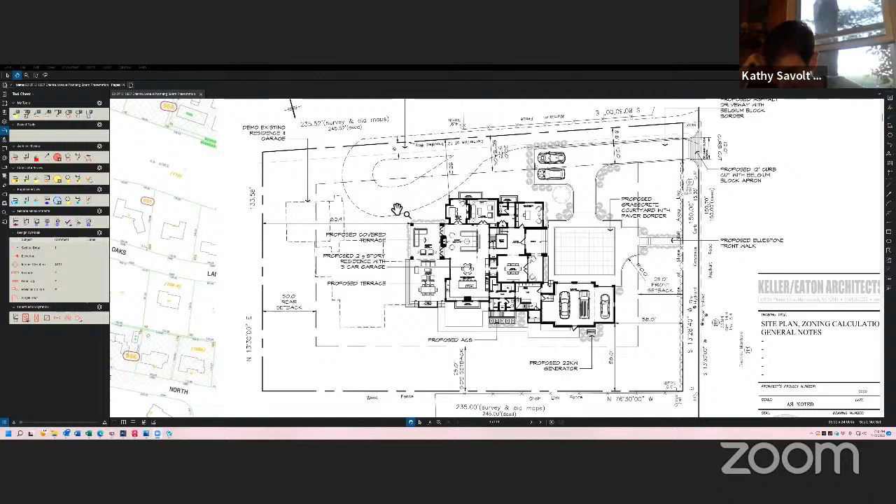I'll start over. So on this side is Orienta Avenue. And the dashed line is the existing footprint of the house that we are taking down. It sits well far into the rear yard. So our goals were to move the house forward, more in keeping with standard positioning of homes.

Some of the other factors that came into play were the fact that we wanted to keep certain of the big trees along the street side, which were rather large. We also wanted to have a driveway with an ability to turn around so we can pull forward onto Orienta, because it's a rather busy road and visibility is a little tough right there at the entryway.

We also like the idea of extending a front walk to the existing sidewalk, so we were more connected to the community. That explains a little bit about how we arrived at where our house sits. As one of the consultants pointed out, there is a travel way along the northerly side of the property. We've moved our driveway completely off that travel way.

And just to briefly talk about that, because it was brought up in one of the consultants' memos. This is a travel way that's at 6 feet on our property and 6 feet on the adjacent properties, more or less. This was put in place decades ago when Bayhead was not built, so there were some landlocked homes, and that was the reason for it. But since Bayhead was created, no property is currently landlocked. And right now it is not a public easement or travel way.

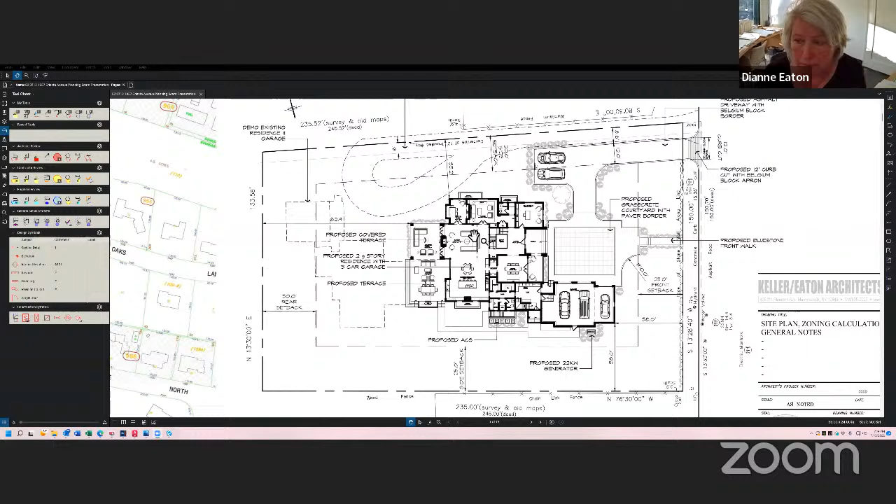My client is in discussions with the neighbors that are impacted just to see exactly what can be done. Our goal would be to remove the gravel because it's rather unsightly and we find it obsolete in terms of functionality, but that's to be determined with the adjacent neighbors. The house is fully complying with all zoning regulations. So I think I'll just start going through the rest of the documents. Sorry, I have a little bit of a scratchy throat.

We have now the consultant drawings from Michael Stein. There are a number of trees that we do have to take down just based on where the house is currently situated. A number of them are really right on top of this home, so we do have to take some down. We were trying to be very mindful of keeping as many as possible, and this is what we arrived at.

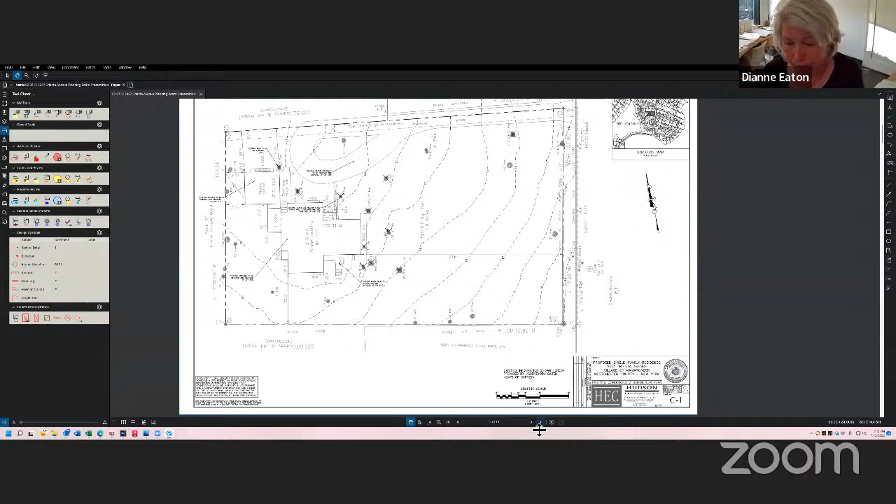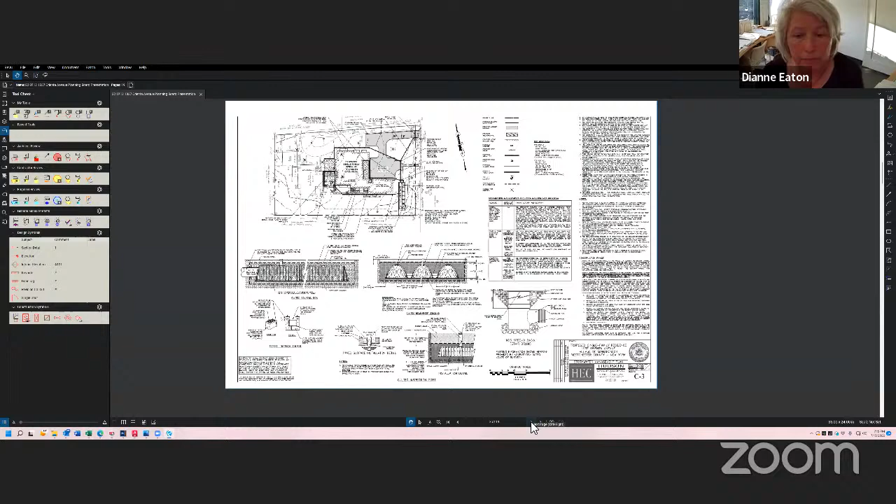Going further along, this is the beginning of the surface water and mitigation plans. We have silt fencing wrapping around, tree protection details. The dry well system we have is situated in the front yard here, and Michael can speak at greater length on that, more details in terms of that Cultec system.

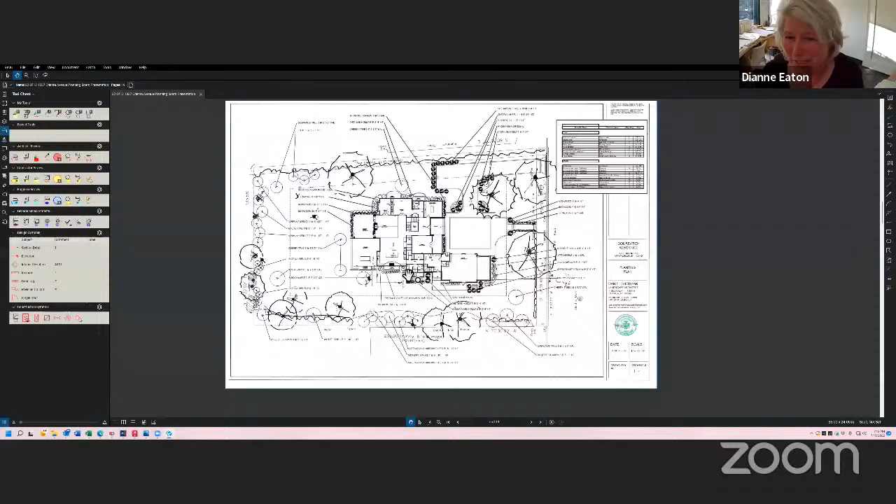Moving on to Dan Sherman's landscape plan, again pointing out some of the trees that we're saving, infilling around the perimeter where we pruned out some invasive species like burning bushes, trees that are dying. There were a number of trees not in great shape. This includes some screening, some boxwood screening around parking areas, nice plantings around walks, screening around condenser units, etc. Dan will be able to talk you through that with much more grace than I just did. These are just additional documentation of things Dan had provided in case you need to refer to them, plant list, etc.

Moving on to the floor plans. It's an L-shaped home. The garage situates forward of the property. There's a drive court here. Then walking in, it's a pretty common layout where foyer, family room, kitchen towards the back of the house, dining room off to the side, mud and service spaces connecting the kitchen to the garage, and a study and some other private, smaller living spaces off to the north side.

We have the children's bedroom over to one side, the master suite on the other. This is on the second floor. Over the garage, we have a study, in this day of everybody working from home, and another guest bedroom for long-term guests. The basement is also fairly typical with a recreation room, gym, and the guest bedroom.

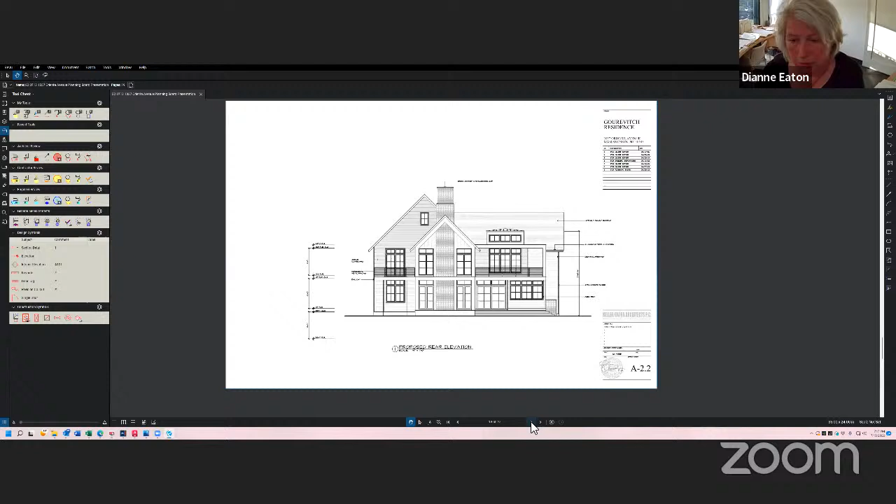Anyone else from your team want to go through any more detail at this point in time, since this is sort of a preliminary overview?

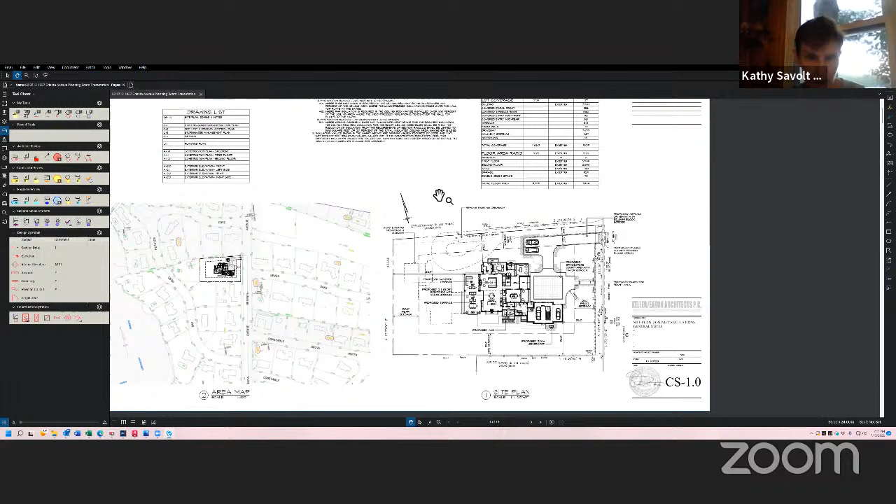Good evening, Michael Stein with Hudson Engineering. Just very briefly, we have received the comments from Kellard Sessions Office, relatively minor things. We've already gone through and addressed most of them, so we'll definitely have the submission in for the next meeting.

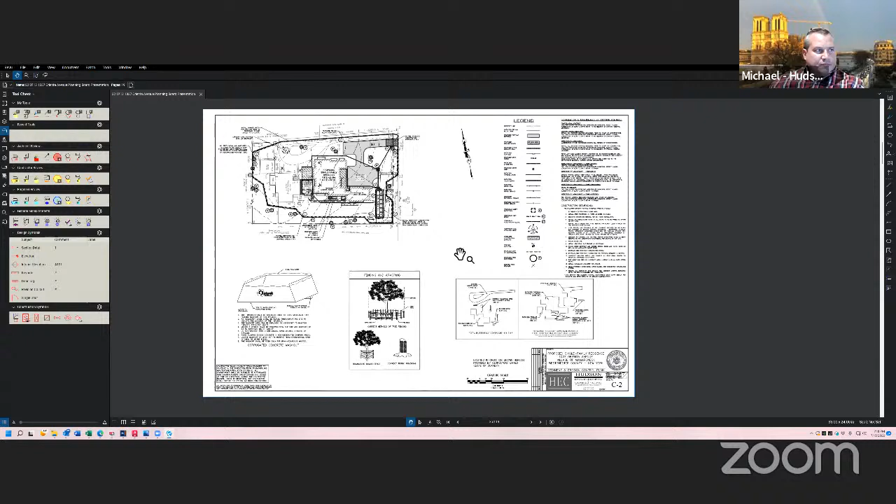Okay. Dan, maybe you'd like to comment. I'm sorry, Dan, would you like to comment on yours? Yeah, if Diane, can you bring my page back up? Yep.

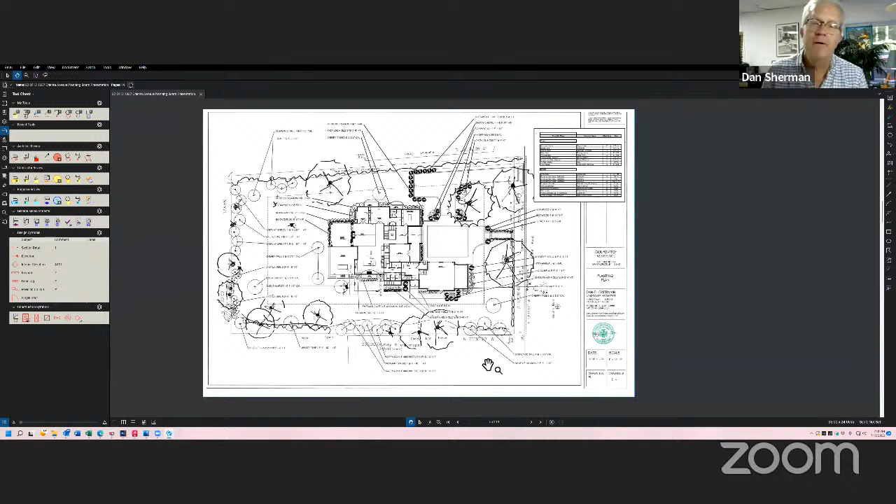So we did a planting plan and we're removing a number of trees, probably at the top. There's about a dozen trees, and I've replaced them with new trees of the very same species. So there's white pine, sugar maple, and cherries that were on the property. But I am also in receipt of the Carabella land design review, and it pointed out that we should try for more native species as well. I think that falls mostly in the shrub category, because in our trees I have sugar maple, river birch, American dogwood, white pine for the trees, and a couple cherries.

I don't think lilac is native, but the shrubs I did not draw from a native list, and I can work on that. I have Andromeda because the deer-resistant boxwood lends itself; it's deer resistant, but also works with the style of the house. The Emerald euonymus is a ground cover that's seasonal and evergreen and attractive, but these are not native things. So that's my next step, to review it and get things that still serve the purpose of making an attractive home for the homeowners, are deer resistant, and serve the purpose, but are native. I'm aware of what kinds of things would do that, but we just got this memo, so I haven't done it yet, but I will. I don't think I can get 100%, but I bet I can get up to 80% native, I think.

Okay, I think that gives us an overview of the project. As you've mentioned, as consultants to the planning board, we do get a jump on things. We kind of fast track, we start the review before the first meeting, so we do have some comments already to give you, and from AKRF to go over some of the things they pointed out to us. Alicia, are you going to do that tonight? Yep, I'm here.

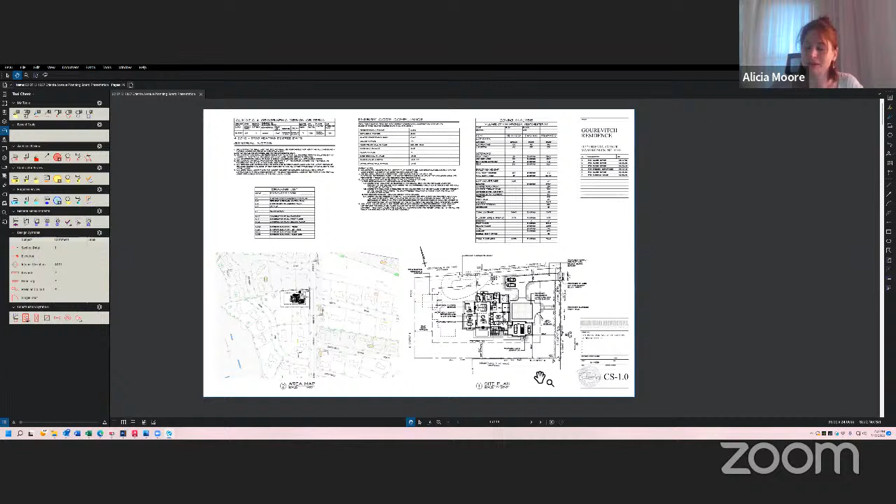And that the site plan, if that could just include the floodplain and the hazard areas. Also, sign the EAF. Those were our main concerns, and of course, recommending that this is a type 2 action under SEQRA.

I tend to go, and I think it was from one of my last hearings, I went to the DEC and that automatically filled that in, as you pointed out. So I did go onto FEMA and printed out a FIRMette, and we are not in any flood zone. I'll provide that documentation in our submittal. And yes, I will sign it.

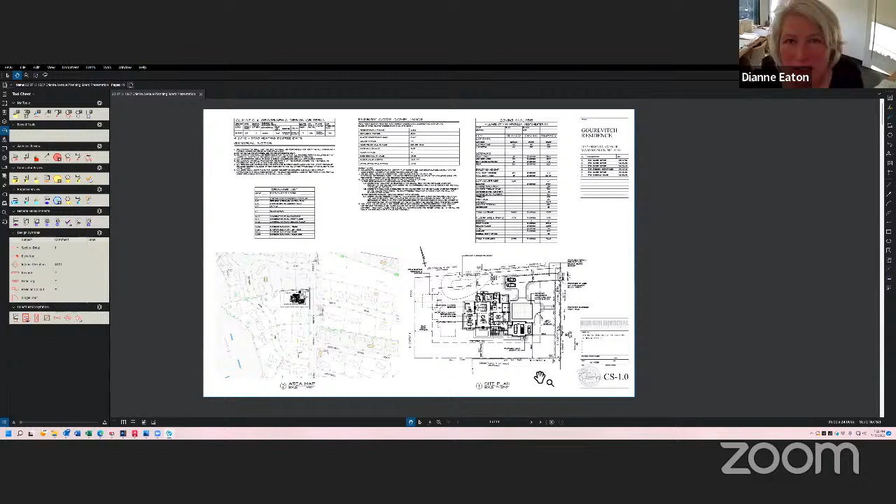We're losing you. We're losing you again. Sorry. Michael, could you comment on the gravel potentially? Her question about the gravel being part of impervious.

As far as our calculations go, we're treating that as impervious, just because it's basically our standard practice, and I know working with Kellard Sessions, that's typically what they're looking for. More than that, as far as lot coverage, typically we wouldn't count that as impervious.

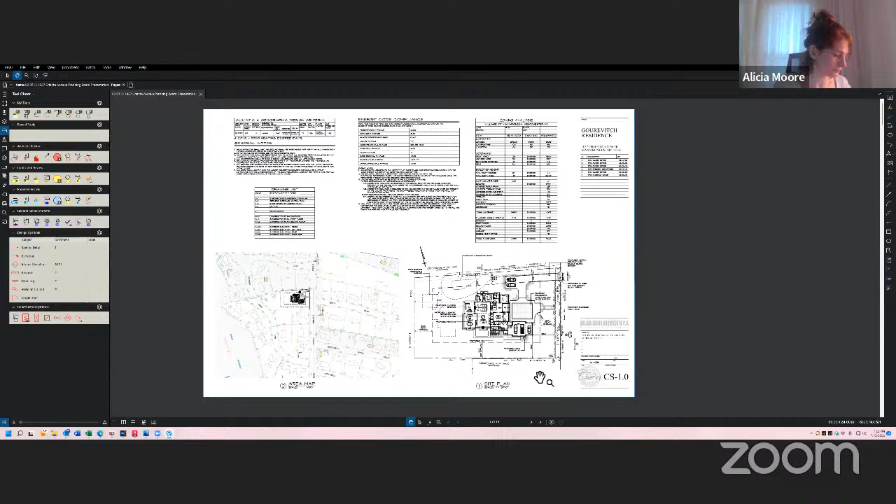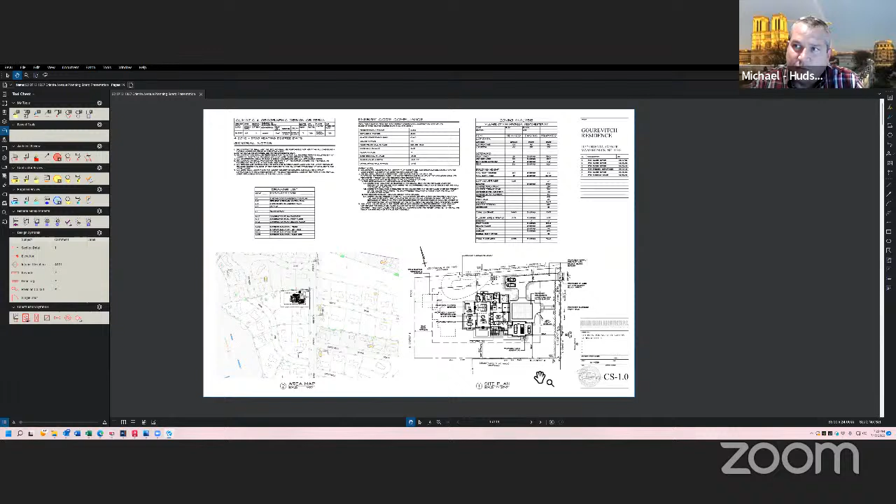Okay, all right, so we just have to make sure if that's not impervious, then it's not calculated in the current inventory of impervious, versus as proposed, because we know there's a significant increase in impervious surface with the size. We'll take a look and review, and just make sure it gets clarified. Yeah, make sure it's fixed, yeah.

Okay, thank you, Alicia. John from Kellard Sessions, you want to go over what your initial comments were? Sure. Good evening. Review of the site plan.

The applicant's proposing to mitigate the stormwater through infiltration devices in the front yard. The important part of their design is that all discharge from impervious surfaces will be detained within those units, and it will all be infiltrated into the ground up to the 25-year storm. Why that's important is there's no drainage on Orienta Avenue, so we won't have any discharge up to the 25-year storm.

I noticed that the house will have a full basement, and I assume a sump pump - correct, for the footing drains, which have to discharge somewhere. We ask that you show that discharge location, and if we can mitigate that flow so we don't have discharge directly to the road or neighbors' properties from the sump pump. I think we've handled other projects in the village with Mike Stein's office, where they've discharged the sump pump to an infiltration unit in the yard, so that we don't have a point discharge.

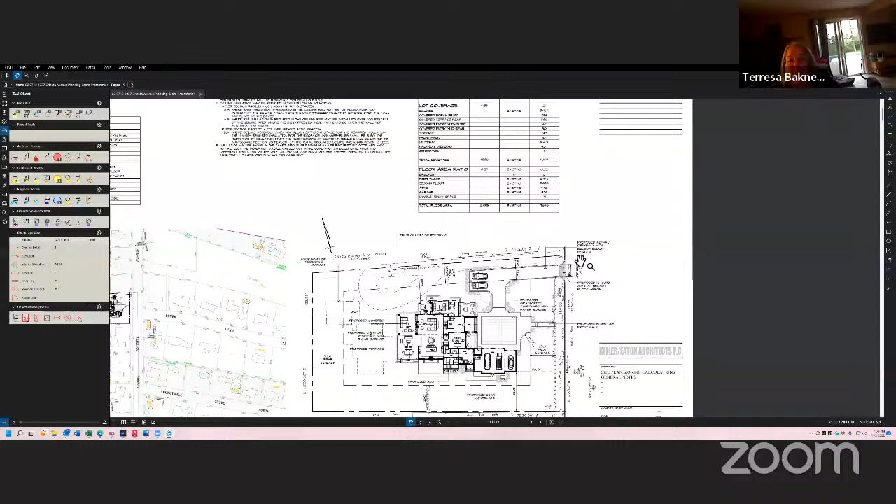Before we leave John and Susan's comments, I just wanted to make an observation. A lot of times the landscape architect will make a change to satisfy a comment by Susan, and it will require more comments from John in the stormwater category. Anything you can do to coordinate that amongst yourselves will make everything easier for everybody and end multiple comment letters. That's just a suggestion on my part.

Not only the details on the plan, but if you are required to plant more trees to replace the ones you're taking down than you have in the plan right now, it's going to impact your stormwater management plans. Just so you're aware of that.

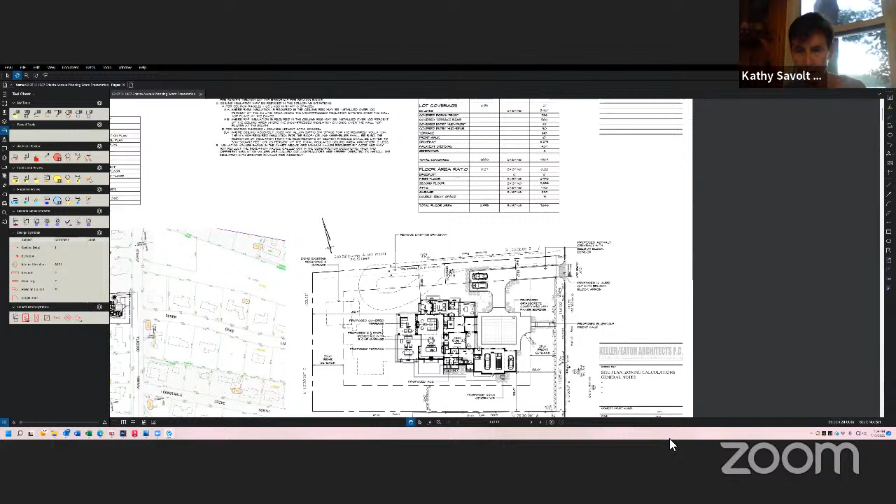Can we get to a view where we see the gallery instead of the screen, please? This is a single family home. We'll type it for SEQRA. But before we do that, does any member of the planning board have any other comments or questions for the applicant, so that they have a full idea of where we stand right now, things they have to respond to, or any questions that we have.

I have a question on the planning board application, third page, section 2 environmental assessment form. Items 5 and 6 were checked yes, and I don't know why, because I'm not sure this site is adjacent, located in, or contiguous to, or has a significant effect on any critical environmental areas, nor do I think it's anywhere near sites of historic, archaeological, or cultural significance. But I think, Ms. Eaton, I don't know — also filled in automatically by this DEC mapper. You're talking about the EAF form?

Yeah, items 5 and 6 under section 2 environmental assessment form. I don't know. Seamus, you're on HCZMC more recently, you asked the exact same question I was going to. If you look at that detailed mapper, Long Island Sound is a critical area, that's what's popping up, and I think we can all assess the proximity of this lot to Long Island Sound. But I don't know why the archaeological sites came up. Yes, but that's also in the EAF mapper, the last page. Computers — sometimes, is it the old saying, garbage in, garbage out? Somebody did a program for something.

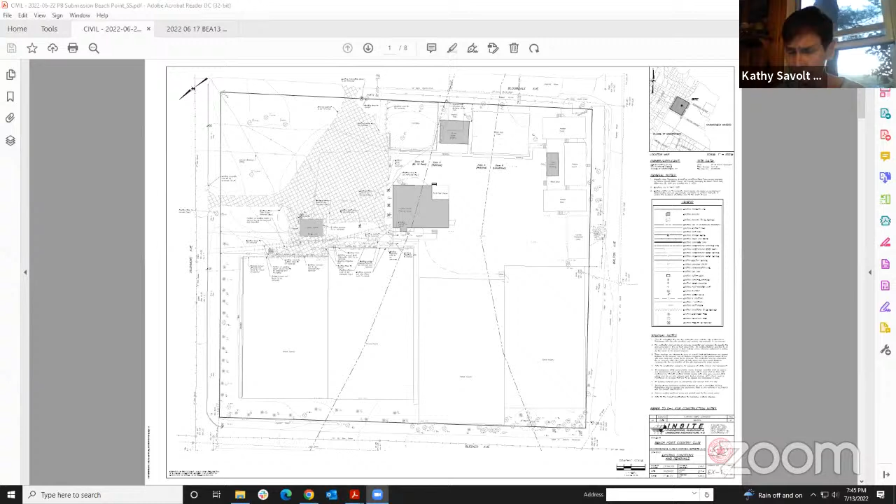My name is Kathleen Gallagher. I am with Insite Engineering, Surveying, and Landscape Architecture. I am also joined tonight by the applicant, Randy Reuter of Beach Point Club. I will share my screen. Does Randy need to be promoted? I just did. Okay, hi Randy.

The proposed project at Beach Point Club consists of the demolition of an existing tennis pro shop building, the construction of a new tennis pro building and a viewing pavilion within the same general area as the previous, the reconfiguration of the existing parking lot, and associated utilities, including upgrading stormwater management practices.

To orient ourselves to the drawings, north is on the top left-hand corner of the screen. Beach Point Club is located at 900 Rushmore Avenue in the Marine Recreation Zone. The club owns two parcels. One parcel is located to the east across from Rushmore Avenue, where the main clubhouse is located, and the second parcel is located to the west, which is the parcel shown on the plans.

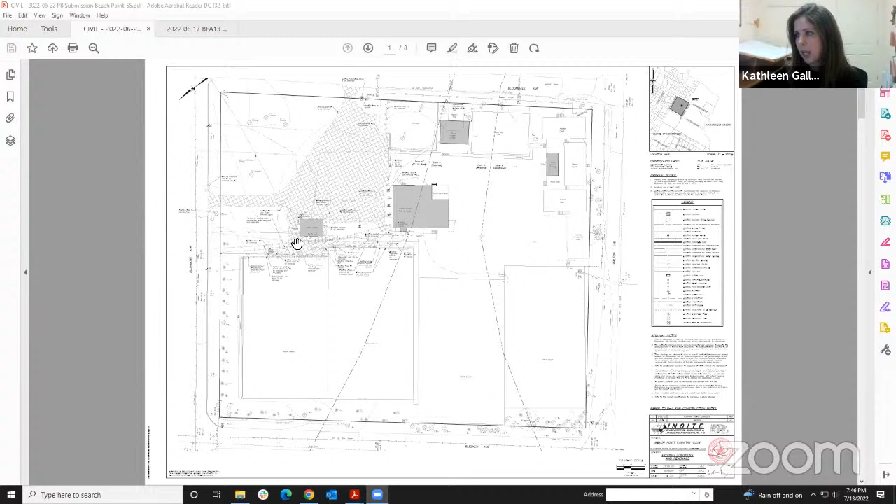This 5.4 acre parcel is flanked on four sides by streets, including Rushmore Avenue, Bloomdale Avenue, Walton Avenue, and Bleeker Avenue. The lot consists of several recreation courts. You can see the tennis courts located on the bottom of the screen, as well as supporting buildings, including the tennis pro shop, which is the subject of the application, located in this area. The existing parking lot to be removed is this large hatched area in the middle of the screen.

It should be noted that the eastern portion of the lot is in the AE 12 floodplain, and you can see that dividing line right here. So we are in a floodplain on this portion of the site, and then it transitions into a hatched zone X and the unhatched zone X.

As previously mentioned, the project includes the demolition of the existing pro shop. And if we move on to the layout and landscaping plan, the construction of a new one-story tennis pro shop and a viewing pavilion in generally the same area as the previous building. The project includes updating the hardscape located around the proposed building, as well as the landscaping in the same general area and the addition of several light poles along the edge of the parking lot.

The landscaping for the project does include the reuse of hydrangeas that are on site and are in pretty good condition, so we are proposing to reuse 25 of those hydrangeas on site.

The existing parking lot that is proposed to be removed currently has around 27 spaces, and we're able to increase the total parking lot to 49 spaces. We were able to do this with only a slight increase to the overall footprint of the site and just making the layout a little more efficient. We were able to substantially increase the total parking on site.

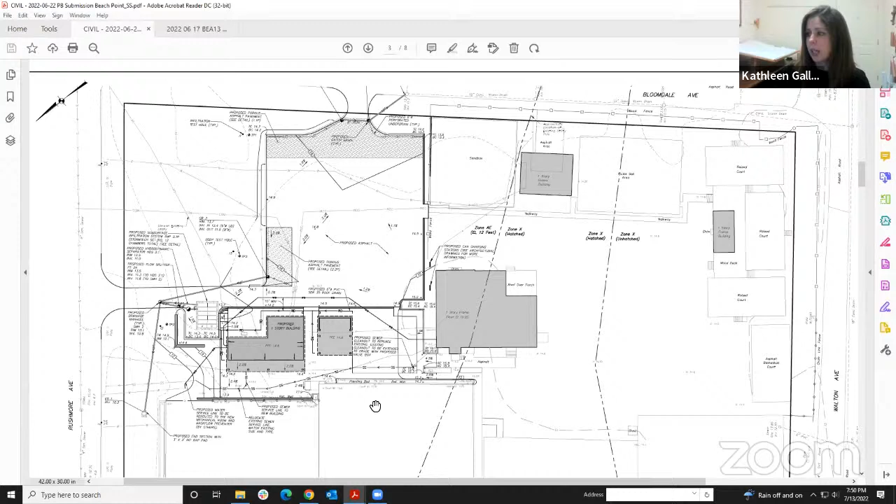Water and sewer service is going to be rerouted but connect into existing conditions and existing connections that we already have on site. And that concludes the main technical portion of our presentation. I'm happy to take any questions from the board or the consultants, as well as hear the consultants' comments.

So do you have any other presentations to do for tonight, or was this everything that sums everything up?

We do not have the architect with us tonight, but I do have their floor plans and elevations. I guess the most illustrative is this elevation, which shows the proposed tennis pro building and then the proposed pavilion. The pavilion is open air on the sides but covered with a roof. Obviously, if we're watching tennis in the sun, we want to provide shaded areas for them in this space.

So we can then pivot to Alicia from AKRF.

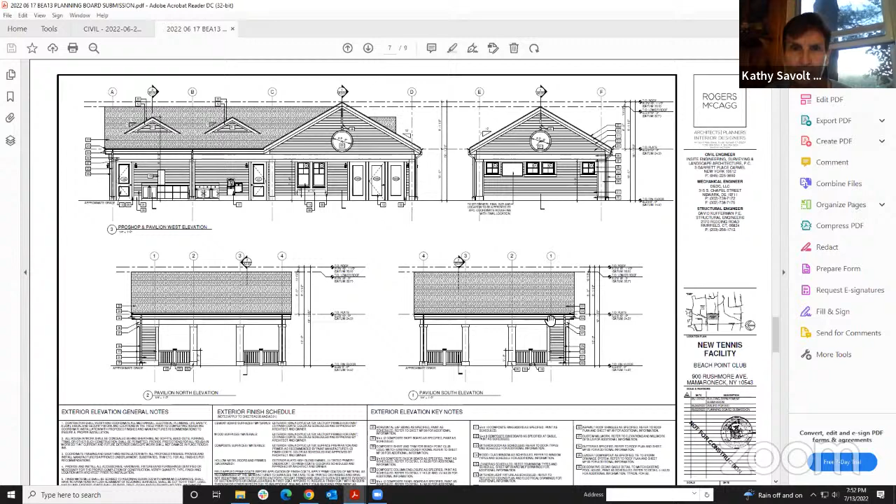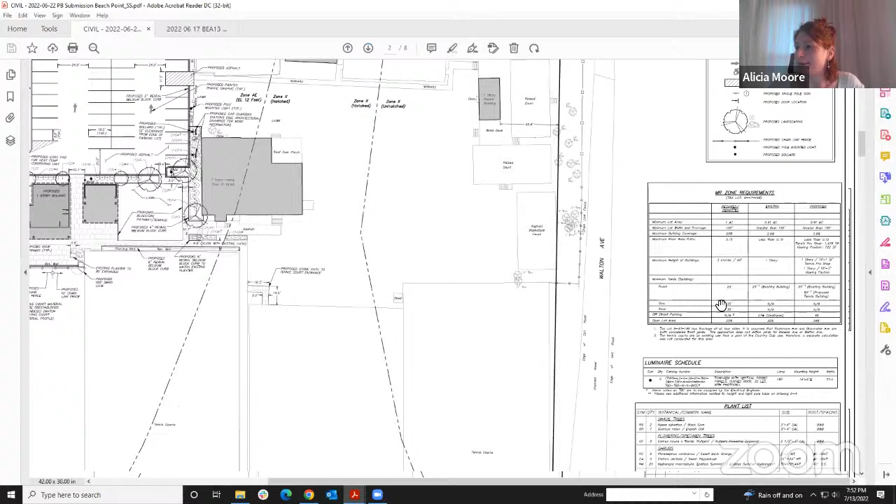Hi. For this one, as a fundamental thing on the site plan, it would be helpful to add a zoning analysis table that compares the proposed dimensions and other technical specs to the requirements already in the zoning code. I do have one question: could you talk a little more about what past requirements we already have on the table? It doesn't have to be tonight, we can talk offline, but I need a little more clarification on the additional categories you want to see on that table.

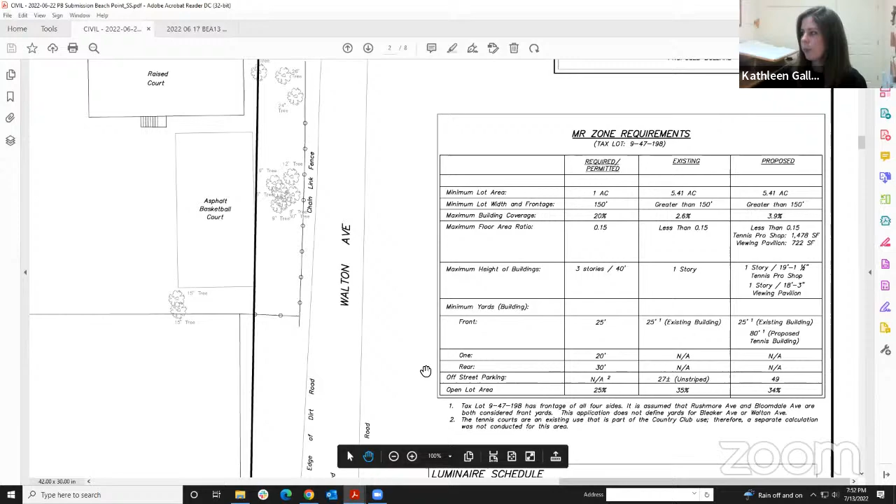Okay, sure, I will take a look at that and send over any comments. Which sheet is this on? I'm sorry, I can't see that. SP1. All right, thank you. That may be sufficient, I just want to take a second look. Perfect.

So yes, we see that you also noted there's another application coming before the board for the marina, and given that that's sufficiently distinct, the applications don't need to be combined. And the parking lot, which is great, would increase efficiency and safety, and I guess that's nearly double the number of parking spaces.

And given the location of the site, the application will need to be referred to the HCZMC, and it also requires approval by the Board of Architectural Review. And as you mentioned, it's in the AE flood zone, so it will have to comply with the additional requirements of Chapter 186 in the code.

And then finally, we're recommending that it's a Type 2 action under SEQRA. That's because of the size, correct? Right. It's number 9. What the exact threshold is, I'm not going to guess, but yes, it's because of the size. Because it's smaller, it's 4,000 square feet, I believe, with the cutoff. Yeah, I believe so.

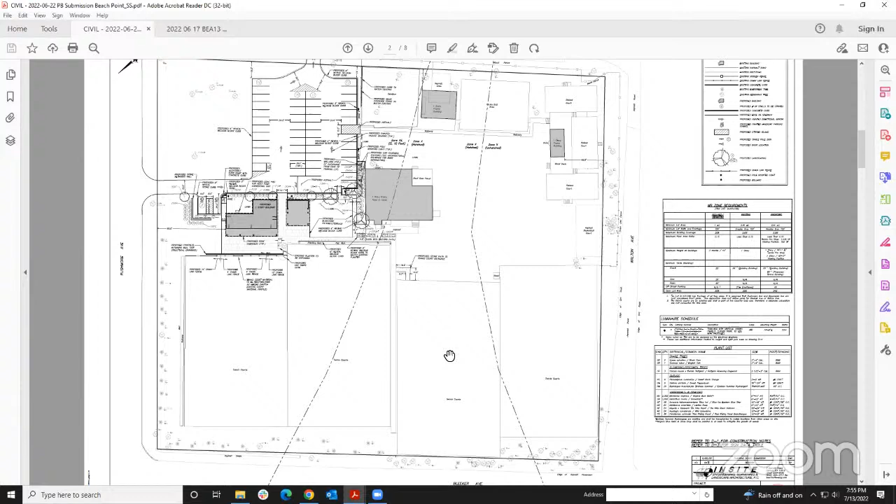That might help us see that. Maybe Brittany can get a hold of that off the notice and disseminate it to the planning board members. Yeah, I can get a copy. Thanks.

Okay, we don't have comments from any other consultants. I don't know if John, is there no review from the consulting engineer because of the size of the project? No, I submitted a review. Oh, must have missed it, I'm sorry.

Why don't you walk us through it then? Sure, enlighten me, I'm not home so I'm kind of in a mess here. As Mrs. Gallagher mentioned, they're mitigating the stormwater through the infiltrators proposed on the northeast side of the property, and using porous pavement.

We're reviewing the calculations. I had some initial comments which I've provided. Many of my comments are just typical housekeeping notes, documenting certain issues with the erosion and sediment control plan, such as the concrete washout areas and the required items that need to be submitted.

The more important items - the first one is the floodplain. It appears there is fill being placed within the floodplain, and the applicant will need to demonstrate that compensatory storage is being provided to compensate for that fill, so that it ends up as a zero net increase of fill on the property. So we maintain the present volume at a minimum.

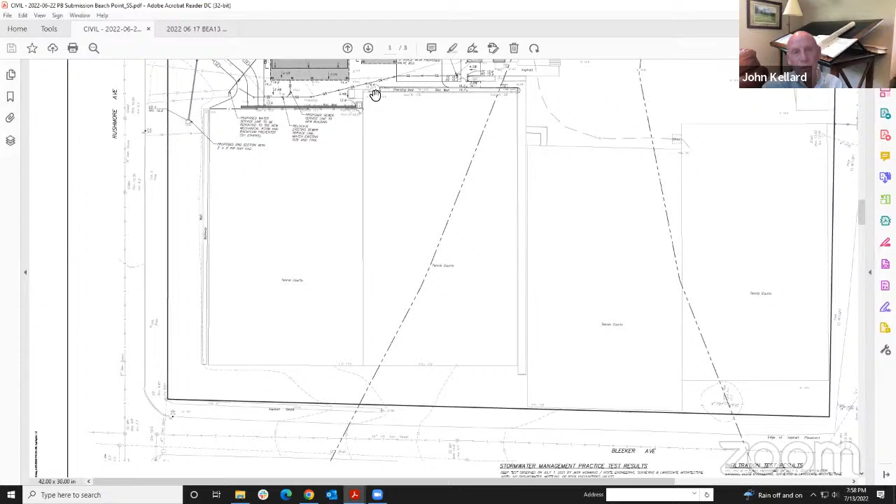It's something we can look at. There are a lot of trees in this area. Could we possibly take a look at what it might take to detain or infiltrate the complete runoff? Possibly a few more infiltrators will eliminate any discharge at all. That's something we can look at, and if you'd like to call me we can talk about it. Great, that'd be great.

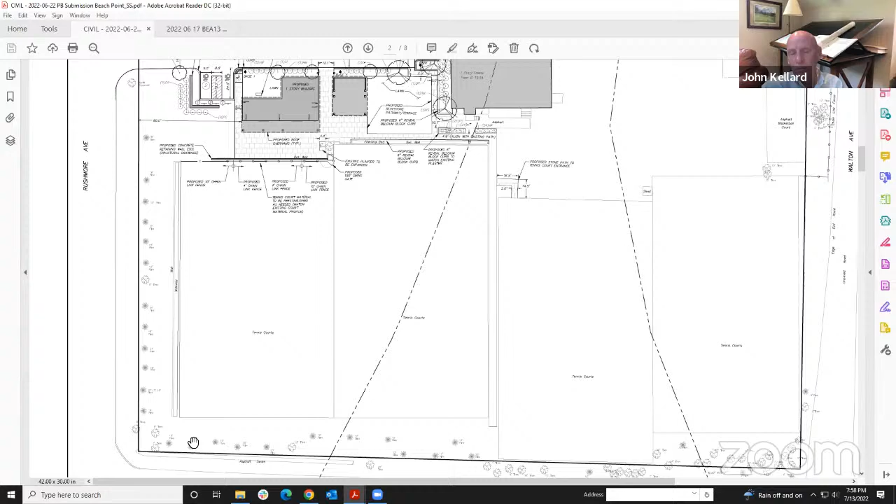On the plan I received, I noticed on the plan you're presenting tonight you have dimensions on the parking lot. I believe the plans submitted to us did not have the dimensions, so I didn't know how wide the spaces were or the drive aisles. It appears this plan does have it.

And obviously I had a concern with the two one-way flows, but now that you explain the daycare and the drop off of the children, I can understand why you're looking to maintain that same flow in one direction.

Obviously you'll need to show any signage in the parking lot. I wasn't sure if the existing parking lot was being maintained, you were just adding to it and topping it, or you were going to remove it and repave it. I just wasn't clear on the plan. It doesn't matter to me one way or the other, it's just if you could clarify that on the plan.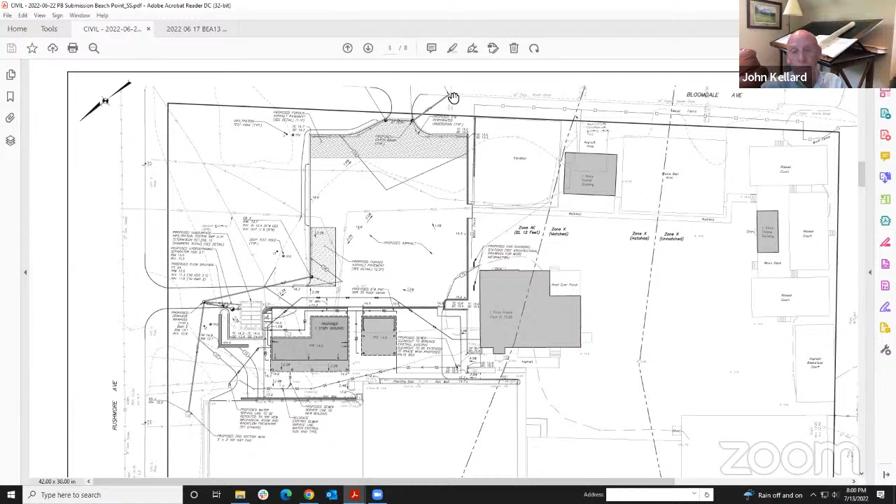Any stockpile locations, concrete washout, as I mentioned before, some standard notes. And obviously you would need a street opening permit from the village DPW for the connection - on the south side you're connecting to the existing drainage system. But other than that, it's a clear plan, easy to understand, and I'm sure it'll work if we can address these few issues. Okay, thank you.

That brings us to our landscape architect. Susan, I don't know if there was a memo because I obviously missed something in my transition here. There was a memo.

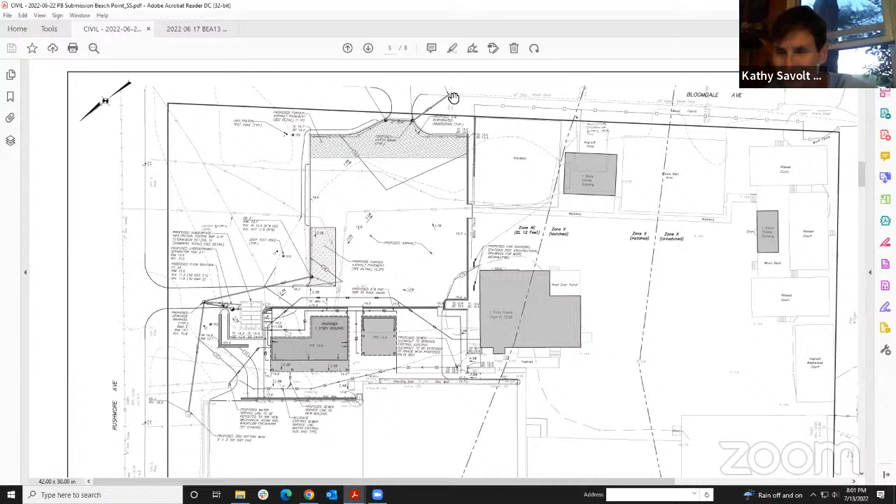Again, a tree preservation plan is needed, which includes the tree protection standard that I included in the memo. As many people have mentioned, due to the site's proximity to Long Island Sound and its location in a floodplain, I'm requesting that all proposed plant material be native and flood tolerant. They're only proposing the removal of 3 evergreen trees, a deciduous tree, and an arborvitae shrub as of now. Once the tree preservation plan is put together and the required replacements for the size of these trees has been addressed - which can also be found in the new tree law, there's a chart that indicates the replacement based on the trees being removed.

Then it can be assessed as a whole.

And arborvitaes are not trees. I am hesitant to call them a tree, but some are so big they look like they don't meet the definition of a tree, which is a single trunk, branches, right? But they've marked that.

We looked this up. I mention it for another project. Just one quick question - I haven't had a chance to really go through that. If our landscape architect has any questions just on the nuances, is it okay if they reach out to you directly just to ask some minor questions?

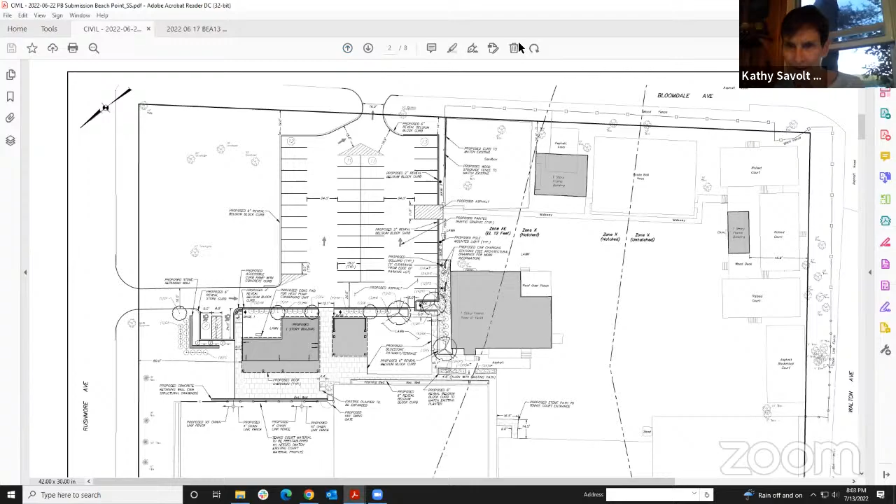Anybody have any comments, questions, concerns to bring up to the applicant now? They will go to HCZM next and work on some of our issues, but they probably won't be back to us until they're finished with HCZM. That's usually the way it works, because the project may change a little bit based on their review. So anybody have any additional comments on what we've already heard?

Yeah, I have a kind of a line of thinking just to ask a little bit about. So I think that the AKRF memo notes, and correct me on this language, that because the other work that this club might do is on a different tax lot, it can be treated separately, but it wasn't clear to me whether it had to be or even should be. So maybe I would start with a question to John Kellard, which is, this is very close to the 1 acre threshold.

And I think that paramount to the village of Mamaroneck, particularly in a location like this - floodplain, right on critical environmental area of Long Island Sound, an important location - if a club is in control and doing a bunch of work and goes over an acre at one time, perhaps they should be taking that next step for either water quality or quantity. So maybe my question would be, how different would the threshold be if the applicant was to design as if it was a 1 acre disturbance?

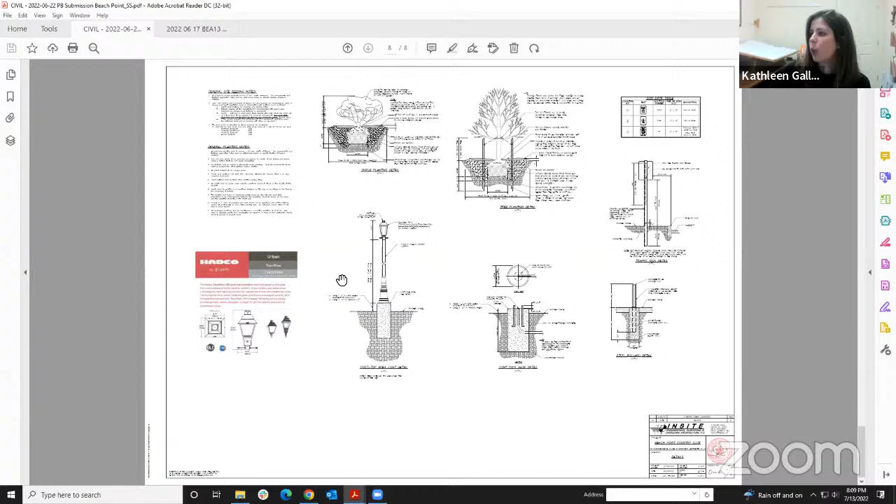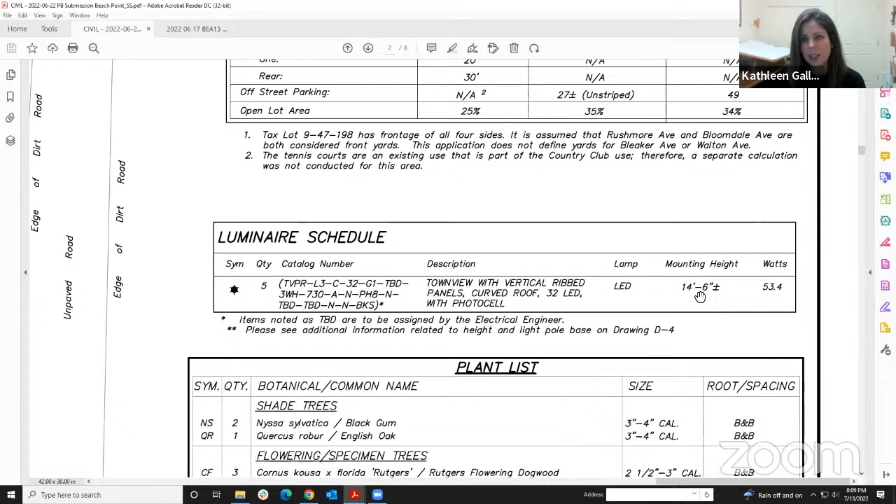We are proposing light poles - I'll give you the actual light height from our detail where we go through the post heights. The mounting height is going to be 14 feet 6 inches, so it's not intended to be your stereotypical 18-foot light poles. They are pole-mounted lights compared to the shoebox style lights you'd see in a parking lot. We wanted to take some additional aesthetics into consideration because of the nature of the club, something a little more higher-end, but keep it as low as physically possible while still providing safety to anybody there at the end of the night in summer or in winter, just to make sure we're providing safety on those perimeter areas. So it's perimeter lighting.

The tennis court's going to be lit? No. Okay, so no night tennis.

And these are downward-facing lights. So although you can see it's kind of this lantern style, it's really housed up above in the cap so that it's downward facing and not providing any sort of light spillage or pollution onto adjacent neighbor properties. Okay, great catch, Teresa.

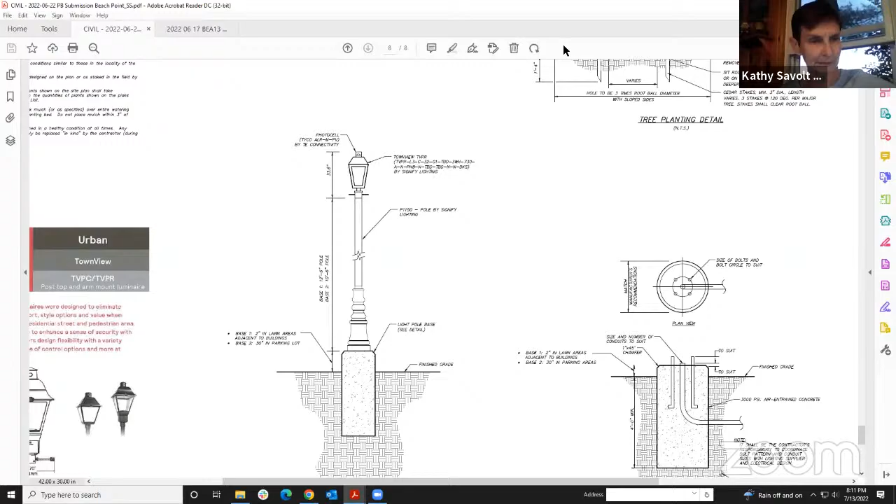Anybody else? If not, that'll wrap this up tonight, and we will see you, I guess, when we finish with HCZM. Correct? I think so. Okay, thank you. You would like to type it and send it on to HCZM? Oh, that's great. Okay, thank you very much. You need to type it before you go to HCZM.

I do actually have one procedural question as we talk about going to HCZM. You've mentioned you don't have an August meeting, which means the next submission, both HCZM and the planning board, don't have an August meeting. So that means the HCZM submission deadline is August 30th, or 31st I believe, and the planning board would be the 24th.

Kathy, Chairman, you had said that you wanted us to completely finish HCZM before we came back to the planning board. Is there any way we could parallel process it, since we have some comments about stormwater and things like that we need to work out? We've found over time, years even, that HCZM works with the applicant and the project might shift or change slightly. So for us to be reviewing a plan that's about to change, we usually don't proceed until consistency, the LWRP, and everything's wrapped up with HCZM - applicants don't come back to the planning board before that.

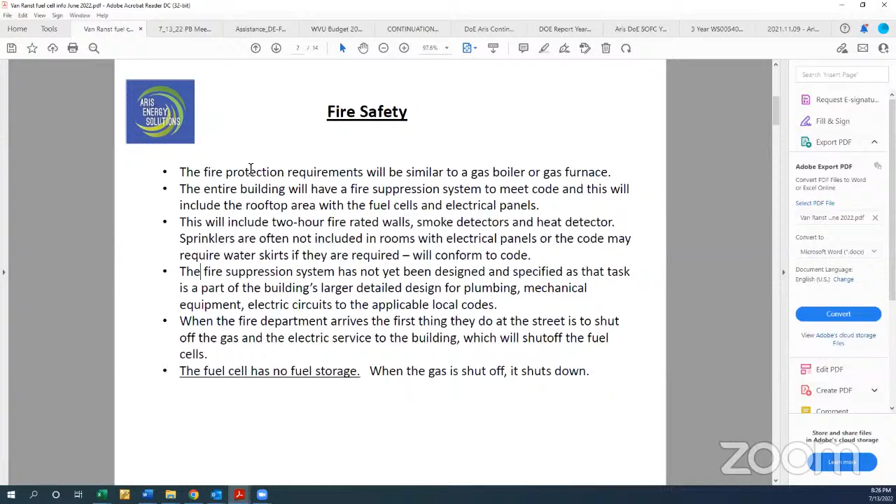I don't know if I want to pause there and collect any questions. One question I have is, as far as the shutoff goes, where will that be? Is that something we'd have to do from the street, like a curb box, because we'd have to wait for the utility company at that point? Right, so yes, it would be at the street, and you're literally starving the fuel cell of its fuel, so it has no choice but to shut down.

And with that location, is that accessible in flood conditions? I think it can be. I think that's a good question, and it's a design parameter that can certainly be built in. That's a really good point, so I think that can be a design requirement. Ordinarily it's not an issue for most building design regarding the gas and electric shutoff, but I think in this case we want to keep both of those things above flood level.

That's pretty much the only question that I have at this moment. Thank you. Okay, great. Anything else that you feel would be important for Sean to see tonight? Not noise, not—okay, that's good. All right, thank you for doing that.

Like I said, it's just serendipitous that we have him here with us tonight. Okay.

We do have a memo from Terabella basically confirming what you said with regards to the changes you've made. I don't know, Susan, if you wanted to say anything else before we get into the discussion of SEQRA. No, in my opinion, everything was addressed, and they came up with a reasonable solution for adding additional shrubs at the rear, and the rooftop...

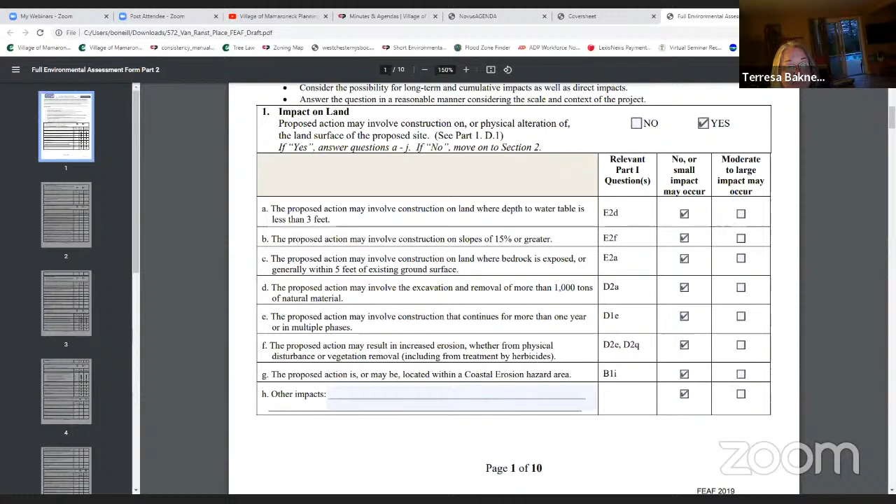That would be the best way to do it, Kathy. So the question is really, we all agree there's an impact on land, and the only question is A through G, should any of those be moderate to large? Looking at the list, does anybody have any questions about the box that's been checked? I don't. Doesn't sound like anybody does.

Okay, move on to the next section then, on the top of page 2, which is impact on geological features. That box is checked no. There's no destruction of cliffs, dunes, and minerals, caves, unless there's an underground cave there that we don't know about. Sounds like there's sand underneath, sandy soil. Everybody good with no impact on geological features? Okay.

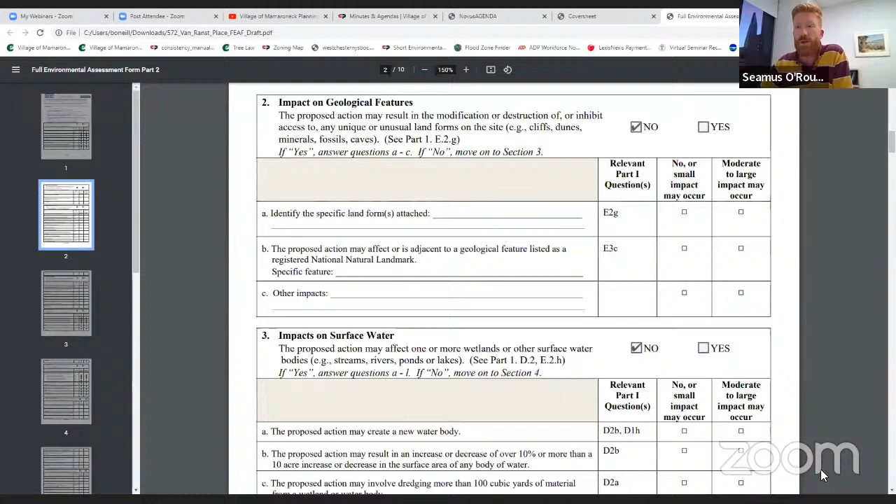Impacts on surface water, impacts on wetlands, streams, rivers, ponds, lakes. Again, this whole section is checked no. This is where I was just going to ask about something Cindy already brought up, which is that my understanding is there's sort of an aquifer under parts of Mamaroneck, maybe around here. What are we looking for in here? Obviously there's no surface water other than the Mamaroneck River here, but is it trying to get at anything else? I'm sorry, Seamus.

There is a section for groundwater, that's where you would talk about the aquifer. So this is really to ferret out whether there's any surface water in the parcel and whether that surface water is being affected by dredging, turbidity, or soil erosion or anything like that. Got it, okay good, so it sounds like no is the correct answer. Yeah, I'm not aware of any surface waters on the property.

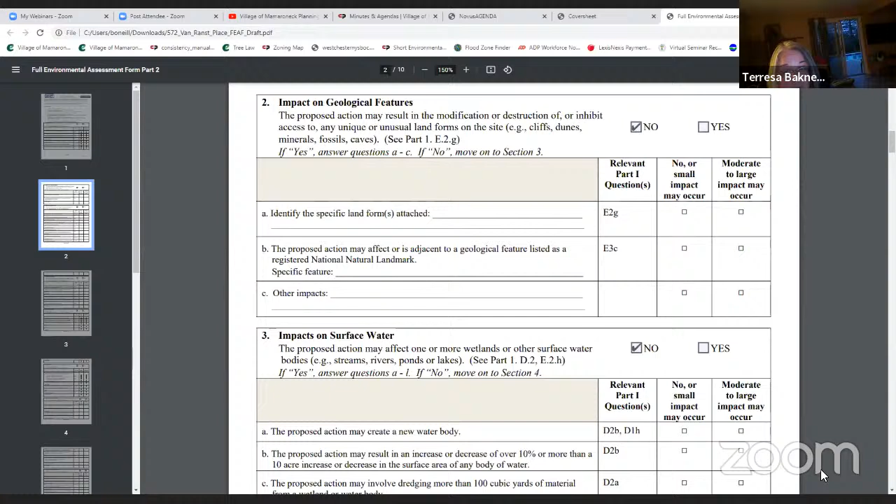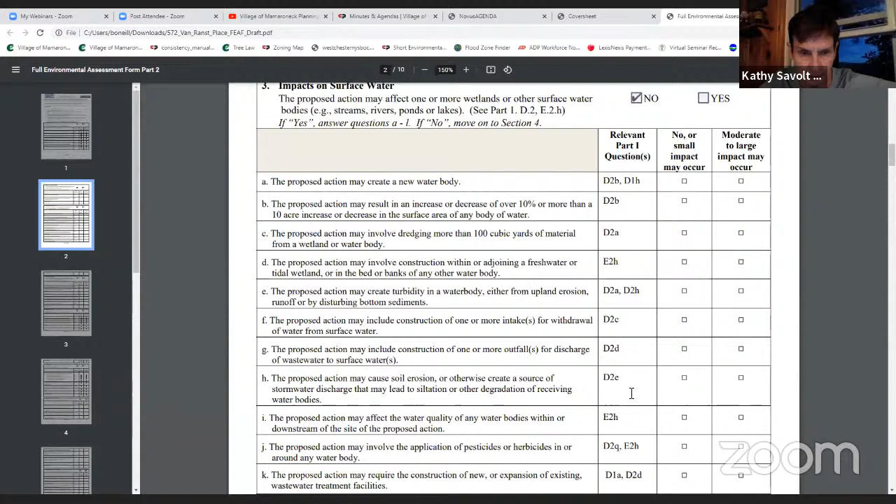Keep going, top of page 3, now the impact on groundwater. There we go, yeah, there we go. So we have a draft check of no. Brittany, scroll down to the next page. Yeah, right there, Section 4, impact on groundwater. Okay, who wants to talk about an aquifer?

Let's talk about the questions first, okay? And there's H for other impacts. I just want to make sure that we're orderly, just to make sure we're not missing something. That's why you're here, Terresa. That's why you get paid the big bucks.

Well, there's no, this is served with public water, so A is really irrelevant here. Yeah, we don't have any water wells. And the next question, B, has to do with water supply demand from a local supply or aquifer, and there's no indication that this use of water is going to cause any of those issues. Same way with C and D, because it's a public sewer. E, again, they're focusing on water supply wells.

F, I don't believe that they're storing bulk storage of petroleum or chemical products over groundwater and aquifer. They've put the utilities and everything on the roof essentially to make sure it doesn't come into contact with it, and really natural gas doesn't do that anyhow. Then the last has to do with the commercial application of pesticides within 100 feet of a potable drinking water or irrigation sources, also not an issue for purposes of this.

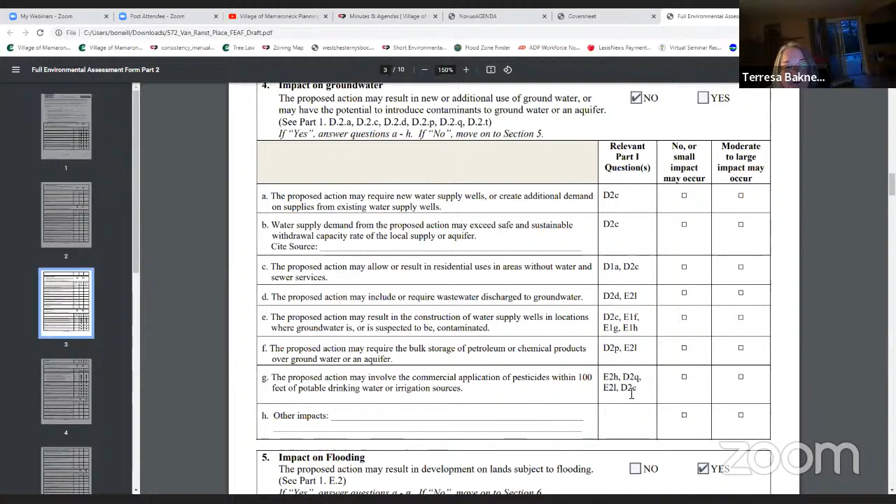Okay, then we can go straight to 5. Brittany, you can scroll down to the bottom half of that page. And here we are, impact on flooding, and obviously that's checked yes.

The first question is, and we just want to confirm this, we're not in a designated floodway. That would actually be part of the estuary or the river or whatever. So that's answered no. And then B and C are definitely yes.

Okay, so those are the questions on flooding. The question then is, maybe we come back to it after we finish the form. Well, if you'd like, I could address it right now from one of the documents we submitted for the flood storage analysis plan.

Your choice, whichever you'd like. Yeah, why don't we address it now? The question for the board is whether there's a significant environmental impact, and significant is a term that's not well defined in the law. It's a little bit subjective, but we have to consider two factors: magnitude and importance. Those are the two things in the law we need to consider regarding the definition of significance.

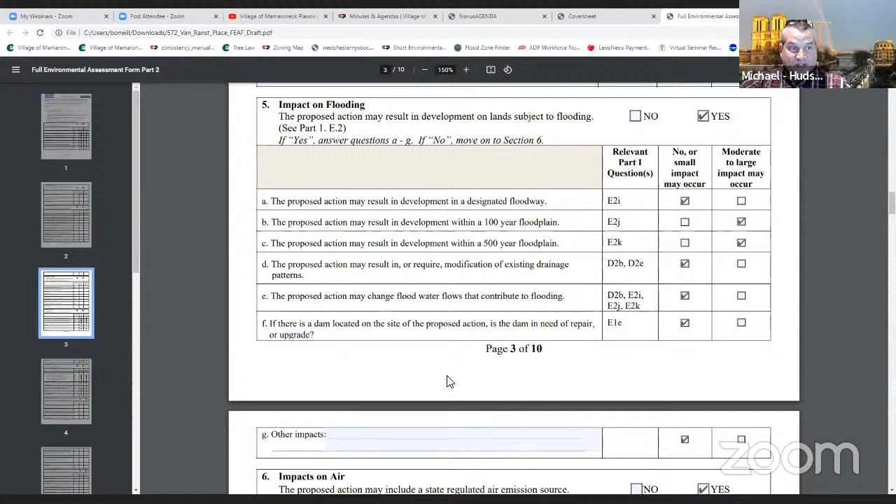Well, that's stormwater, this is about flood flows. So the question is, does the placement of the structure on the property, or the change between the existing structure and the proposed structure, affect how floodwater flows will act in that area or not?

That's a great question. The current building does not meet flood development and FEMA standards because it predates that. The building we're proposing is going to be lifted. In fact, that's one of the variances we need from the zoning board.

So we're lifting it nearly 8 feet above the base flood elevation. FEMA and village standards require only 2 feet above. So we're lifting the building 8 feet above base flood to allow the flood water to move freely. That actually goes to what we'll talk about with flooding later in terms of the impact to the flood zone, because we're going above and beyond flood development standards and greatly improving the condition as it exists now.

Yeah, I think that addresses it pretty directly. Do you mean that the lot now will allow floodwater, whether it's receding or moving, to move better than currently? Correct, as it has to.

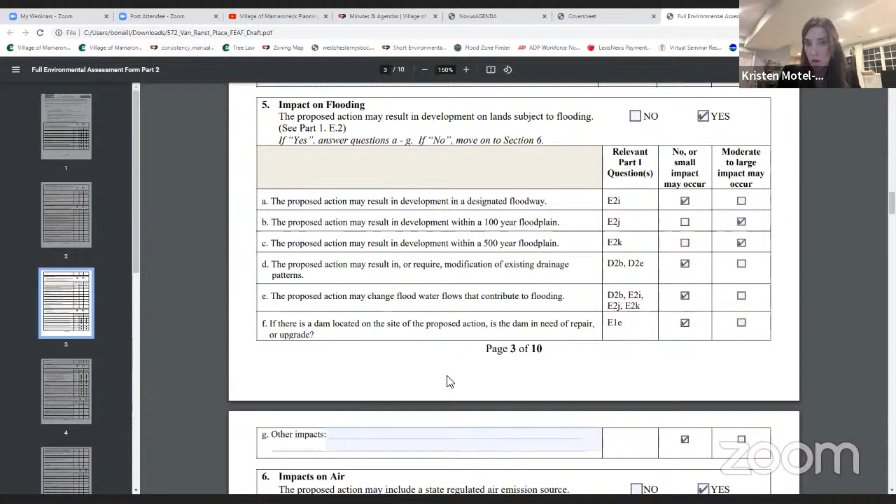So the garage is going to be equipped with the required flood vents to allow the flow of water back and forth. It's not a solid wall.

And also the side yard setback, we only need that variance because of the queuing platform that we're putting at the second floor. That's not the footprint of the building, it's only a second floor queuing platform that Harbor Coastal requested we incorporate. In correspondence with emergency responders, that was something added to the project later on, but it does encroach into the side yard setback, even though it's not at grade.

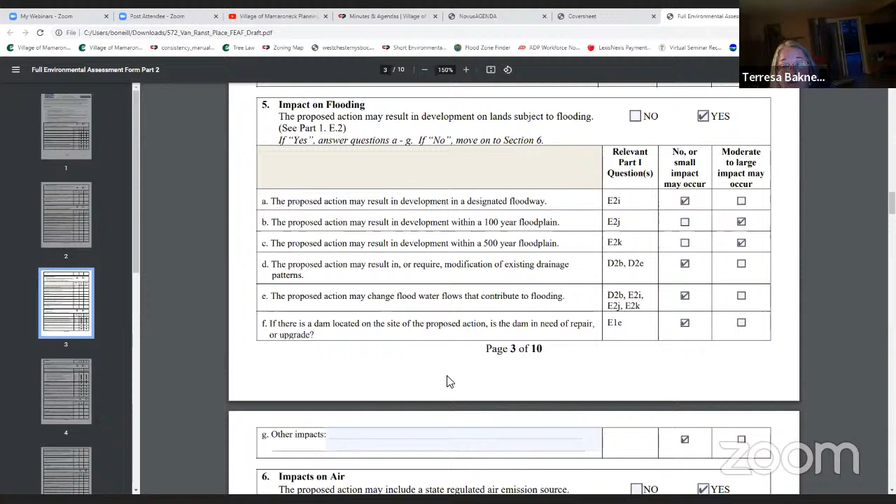So when you talk about the queuing platform, you mean the place where people go if there's flooding so they can get out? I just wanted to make sure. Yeah, thank you, no problem. Some of us are so far into this. Thank you, Terresa, it's helpful.

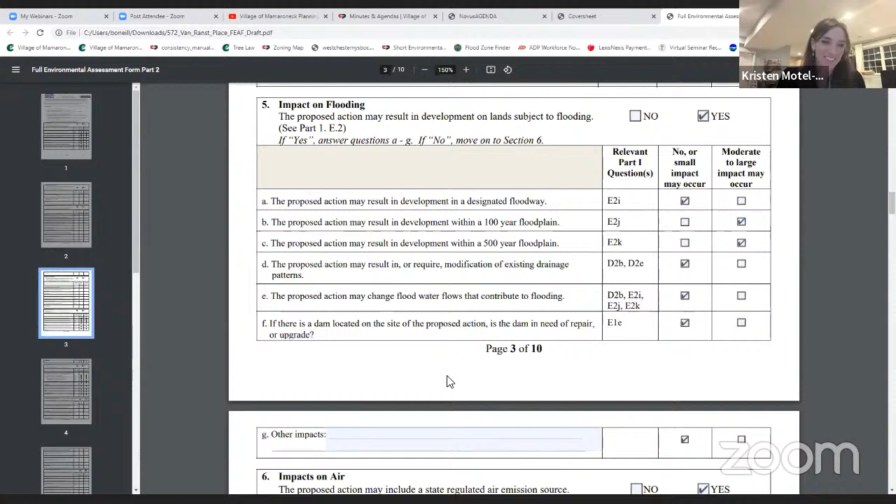Okay, then I think we can go on to 6, knowing that we're going to come back to B and C.

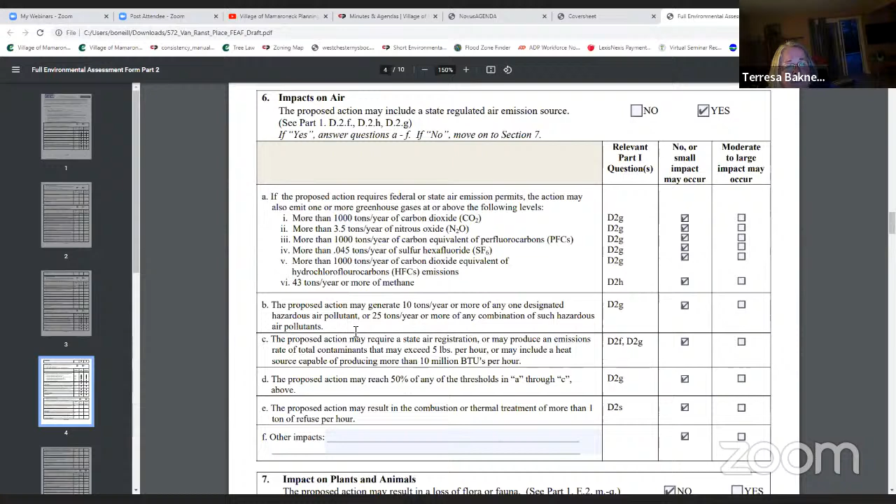Impacts on air, this is checked yes, but everything is checked no or small impact. This section of the EAF is really meant more for like a power plant, something that's going to have an air emission source, not typically associated with residential housing. So they're not close to any of these thresholds. I believe they confirmed they don't even need a state air registration for what they're proposing to put here. Is that correct, Kristen? Yes, that's correct, because there's no on-site combustion occurring.

So really the form should be checked no for impacts on air. You could do it that way. There are some pollutants being emitted, but not in the quantities listed here, Cindy—not 1,000 tons a year, no. Who writes these things, where do they live? DEC creates the forms.

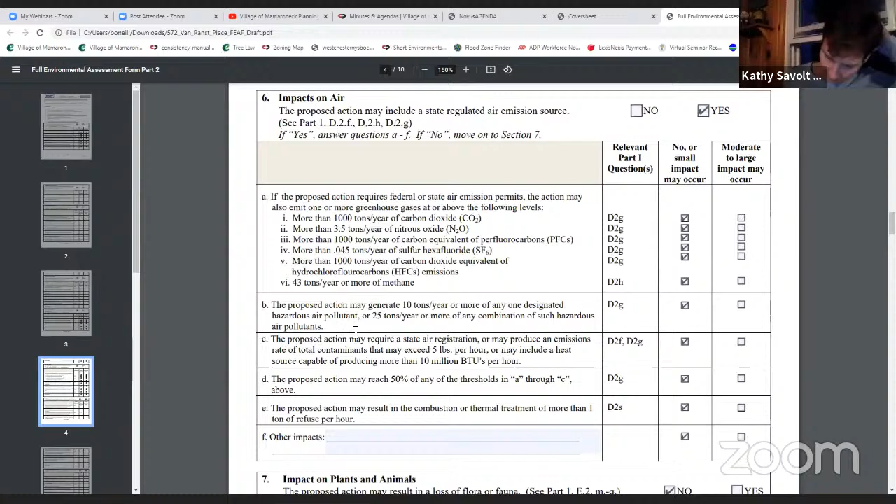All right, everybody comfortable with 6? Let's move on to 7, plants and animals. The proposed action may result in a loss of flora or fauna, and it's checked no. I don't think anybody's going to disagree with that.

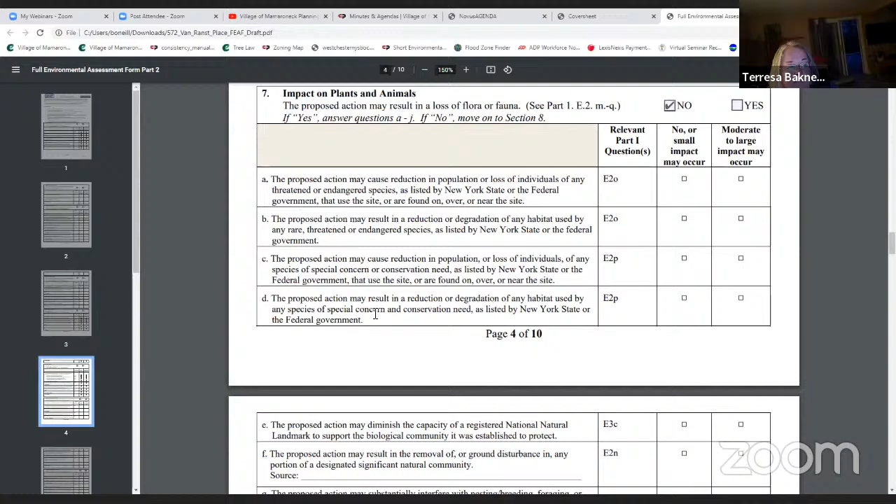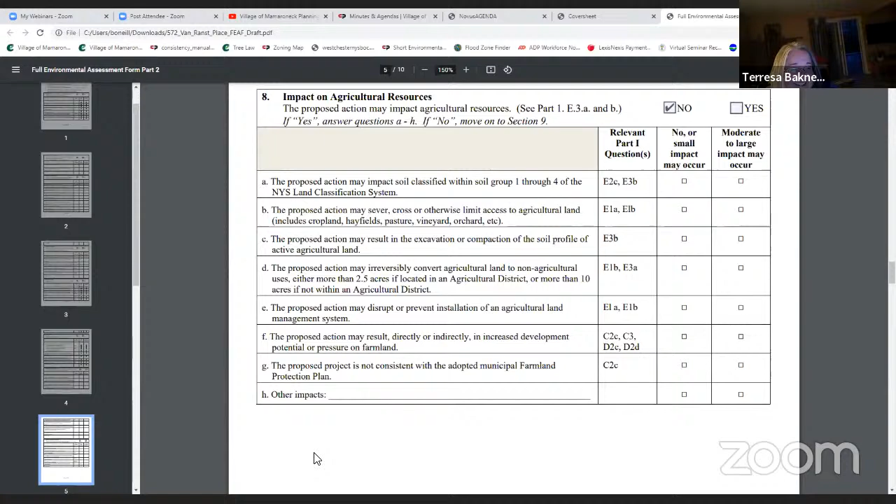That brings us to 8, impact on agricultural resources. That's a no, on the land. Okay, 9, impact on aesthetic resources, that's also a no. Is there a scenic resource there on the site? I don't think so.

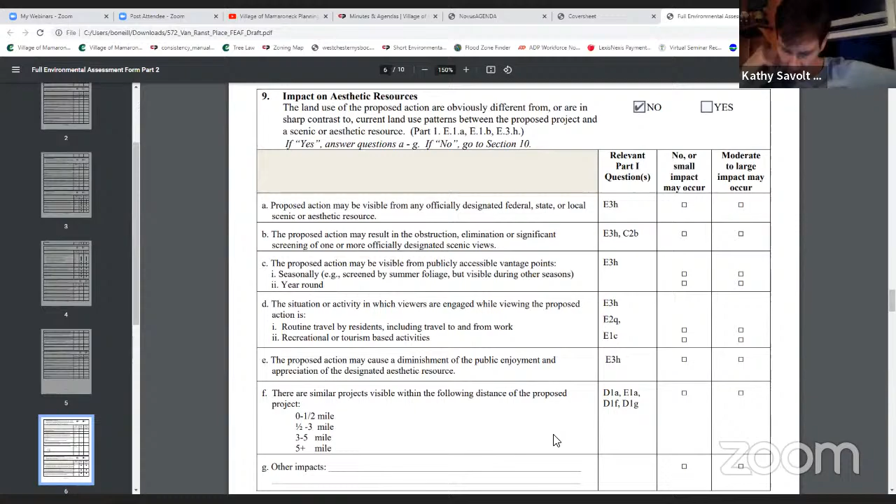Everybody good on that? Then we have 10, impact on historic and archaeological resources, and this is checked yes, that the proposed action may occur in or adjacent to a historic or archaeological resource. Is that because the building's old? It may be something that's automatically checked. Yeah, it's probably automatically checked. I think it was automatically checked because of the retaining walls in the Mamaroneck River.

Maybe Alicia, AKRF filled this out for us. Alicia, can you explain? This was matched very helpfully since they have the references here. This was matched to the submitted part 1.

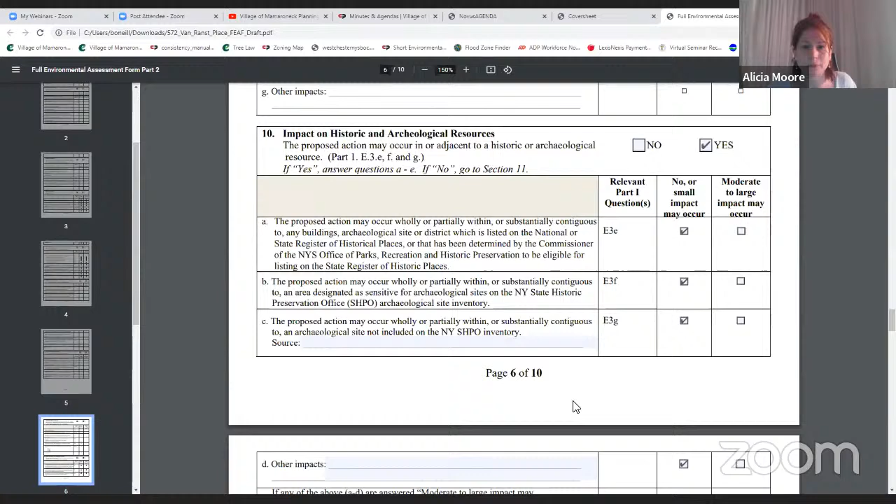So likely what happens off part 1. One of these questions was marked yes, but on the specific analysis it was either no or pretty small. Kristen, if you guys checked it yes, you checked it because of the river.

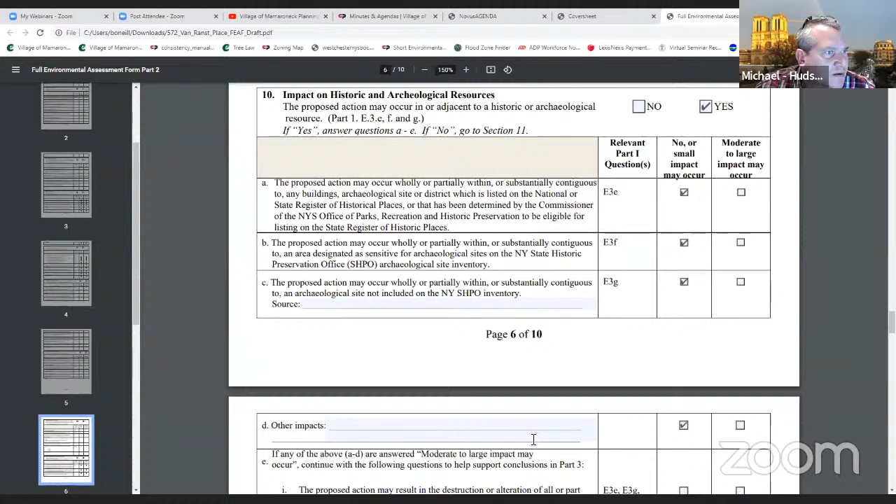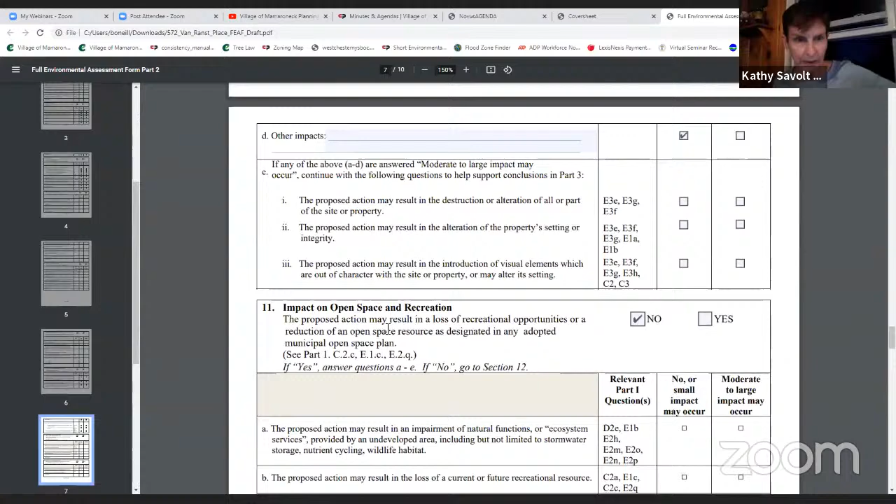Here it says archaeological site inventory. Is that filled in? No, I'm just trying to look through the EAF here. I don't think anybody really. It's the last page, the Sheldrake River retaining wall. Sorry, we're going fast for you, Brittany.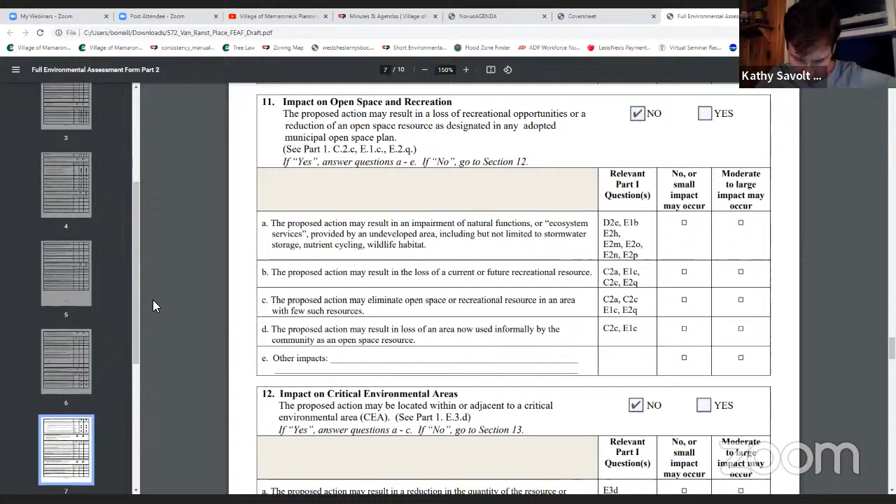11, impact on open space and recreation, that's checked no. Impact on a critical environmental area, that's checked no. I don't think that's designated a critical environmental area here in Mamaroneck. Impact on transportation, no. Impact on energy, yes.

Proposed action may cause an increase in the use of energy. We're going from a single family home or multiple, I think it's one family. Pretty much always yes, and no or small impact may occur, because of the way they have the question, you've just got to say yes. There are more units - you're going from 4 units to 10 units.

Impact on noise, odor, and light. That's also checked yes with no or small impact on noise levels. We had a discussion about the noise level from the mechanicals and the fuel cells on the roof. Blasting, no. Odors for more than an hour a day, no. Light shining into adjoining properties, no.

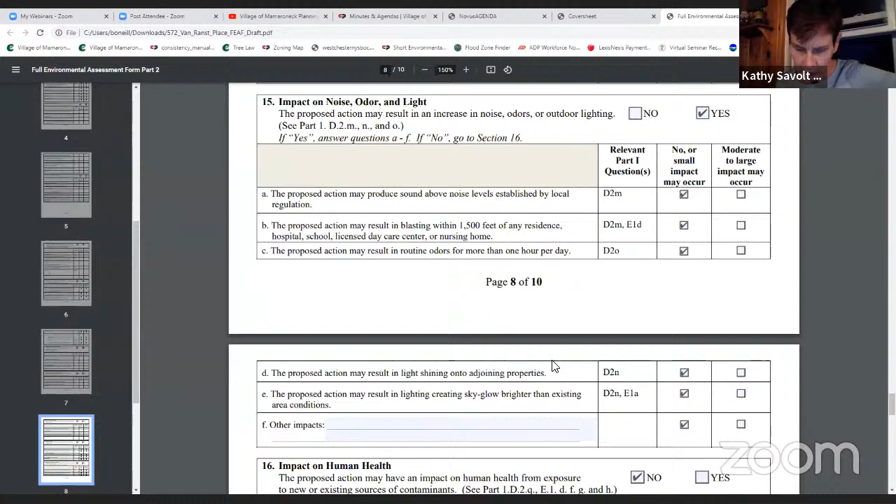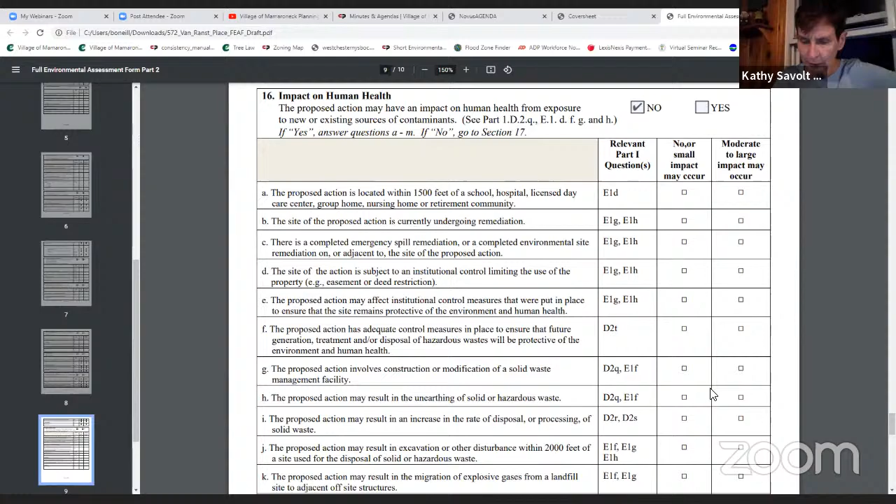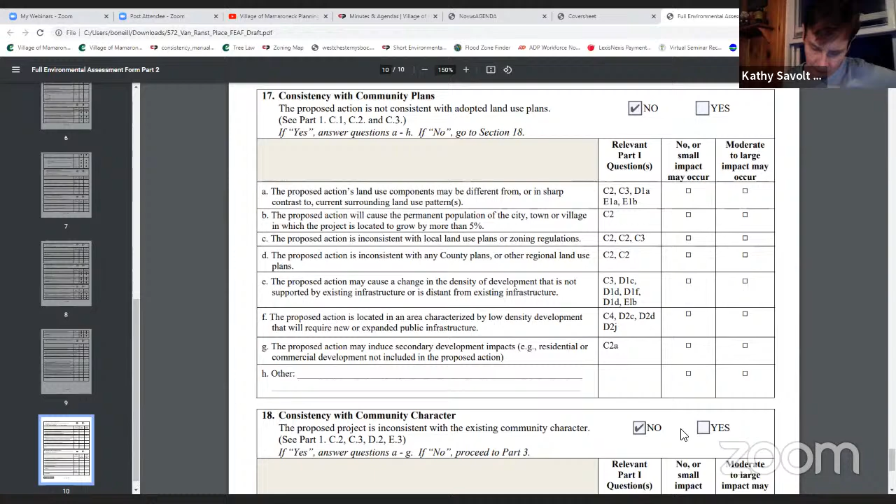Impact on human health, new or existing sources of contaminants, that's checked no. Consistency with community plans - is it not consistent? The answer is no, it's consistent. There are several buildings right with it. And consistency with community character, that too is checked no.

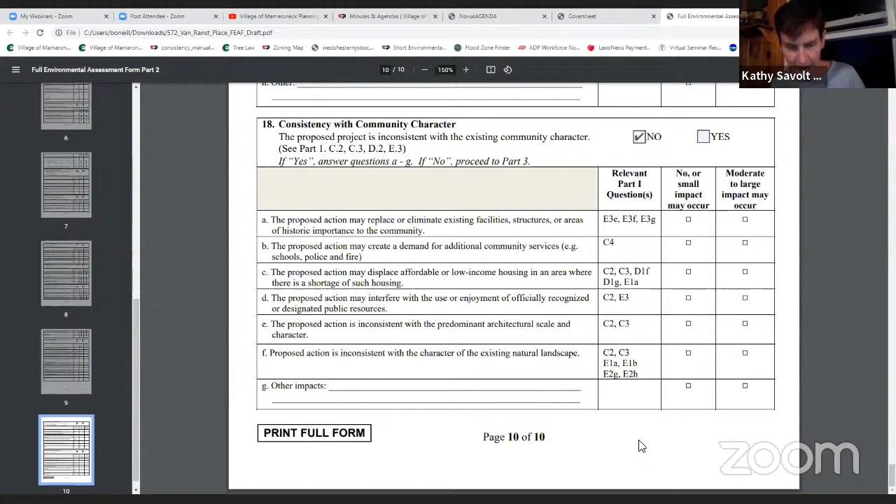That brings us back to impact on flooding. The action is in a 100-year floodplain and a 500-year floodplain. That's 5, bottom of page 3, 5B and C. Okay, those are the two, that's the big question here. This is in a flood zone.

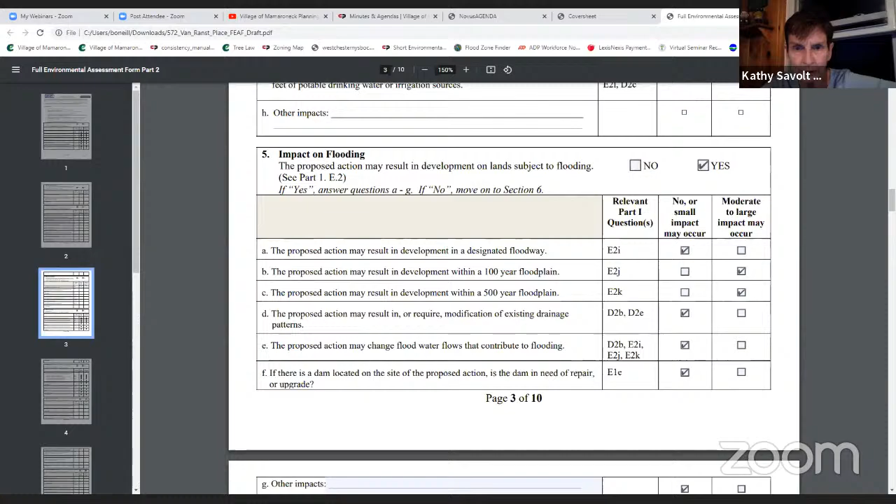Everybody is still smarting from Ida, and this application came in right after that. You've done a lot of work, so Michael, you wanted to say a few words about this? Yeah, if I could have the share screen I could bring it right up, I think that would be helpful. I don't think we need the form anymore on the screen, so you could take yours down. Okay, so this is one of the documents we had submitted.

This was a flood storage analysis that we had prepared. The different colors represent different elevations on the site. If you look to the one on the left, that's existing conditions, the one on the right is the proposed conditions. We put together a summary of the flood storage volume at each elevation. The intent of this plan is to demonstrate that at each of the elevations on the site, we're not taking up any flood storage volume at that elevation, because you may have some storms that only flood to a certain elevation, so just because you provide more volume at a higher elevation doesn't mean you've mitigated it at that same elevation.

In this case, at elevation 19 and below, both have no storage below that level. In the existing conditions at elevation 20 and below, we have 979 cubic feet of storage volume. In the proposed conditions, that actually increases to 1,220 cubic feet of storage. And keep going all the way up - in the end, for the total flood storage volume, we have more flood storage volume being provided at each of the incremental storage levels.

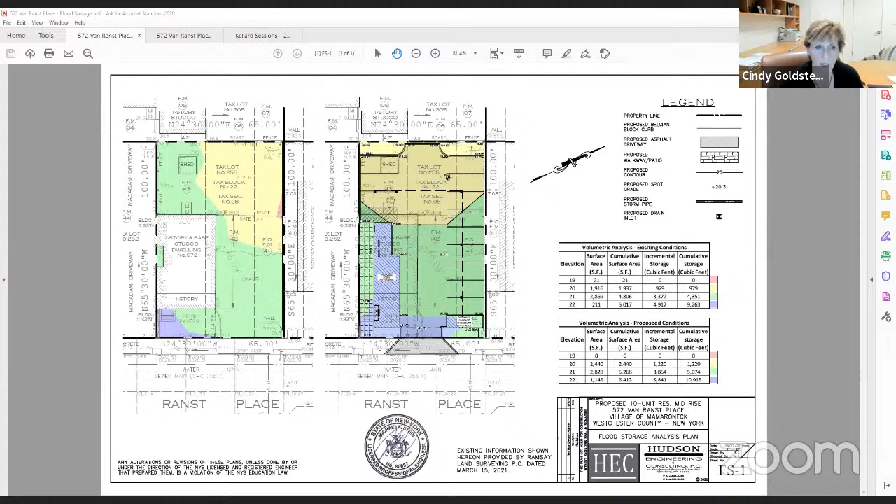I know this can be developed according to the zoning code with or without variances, depending on how that goes. It may be something as simple as requiring, this is a rental building if I recall properly, that all the leases, or they do an annual drill, or they have to comply with evacuation notices.

That would solve a lot of the problem if everybody just evacuated with an early warning system. We've got to give people a fighting chance, and sheltering in place in a building for 3 or 4 days is not so much fun, even if you don't have a heart attack.

So Cindy, the owners of the building would do exactly that. And that goes to moving cars too, right? Not just moving people. So they would be willing to agree to a similar condition.

As I mentioned before, we have been including the emergency responders on our plans. John Sullivan's office has reached out and had discussions with them. It's my understanding, and I think we talked about this a few months ago, given the nature of those positions, there isn't going to be anything put into writing about the project, but they have been looped in. We have received feedback, and we've made significant amendments to the plans based on that.

And to your point, which is a great one, a lot of it is management and preparedness, which is excellent. Brendan's on, but I think I speak for him when I say that's absolutely something that they would agree to. Is that something that you can amend your application to state, Kristen, so we have it in the record?

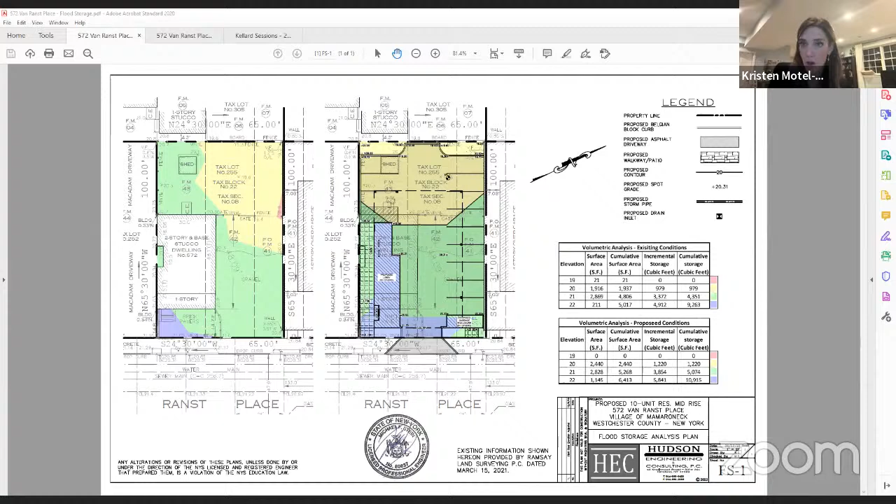I know we do have in the record from a few months ago stating that we would have an emergency evacuation plan, an emergency management plan, and we work with the village to figure out what that was. When we reached out, there wasn't an existing template. I think this is going back to February or March. So that's already in the record, but if there's something additional that goes above and beyond whatever would be encompassed in that, we could certainly do that.

Well, I think it would be easier for the planning board members to make a finding with respect to this if they had what the components of that evacuation plan are going to be. Am I right, Kathy? That's what you're looking for.

Yes, essentially, and some way to implement it so in 5 years it's still there. And I don't know what that is, and maybe there's something else out there that I don't know about that first responders might know would be helpful.

I mean, people build in the floodplain all the time, but maybe they don't take a lot of precautions. And if you're willing to do the paperwork, and be as robust in a plan to keep tenants and visitors apprised of what's going on, that would help me.

Well, there's a lot of things at play here. There were a lot of buildings built in that area before Ida. They were raised, and on the ground floor there was only parking, and everybody was supposed to move their cars, but during Ida, nobody moved their cars and thousands of cars were lost in the village of Mamaroneck.

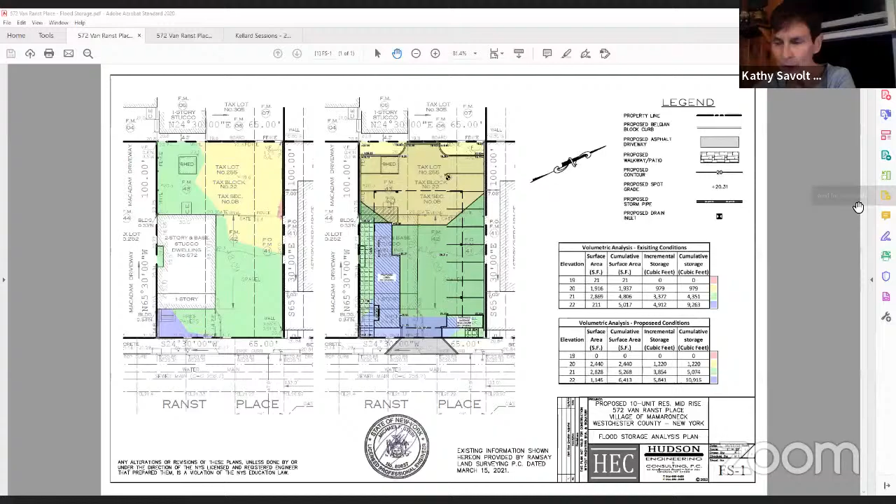We have to learn how to live with this somehow, and I don't know what the answer is. But an emergency management plan for a rental building, making sure that all new renters, anybody who comes in there, knows what they're getting themselves into, and that they have to pay attention to the warnings.

So we just moved something and my computer screen changed. Okay.

They sign a lease and they sign a statement that says, I understand that there are things I'm going to have to do if there are flood warnings, and pay attention to them. But to be practical, Kathy, that's not a very good marketing ploy. I understand that, but we have to find, human beings are human beings. They're going to have to get dragged out.

Well, I think what Ida showed us, the prior storms, I think it was the regulars, the old timers, the people who have lived there for generations, they're used to flooding. Not that it's any easier for them, but it wasn't such a surprise. But what we saw were people's possessions, and people were devastated, and they had no idea they lived in a flood prone area. And it was that lack of knowledge that made them think, oh, it's just a drill.

I don't really have to evacuate. But human nature, I can't fight that either. I mean, even people who literally had a commercial property right next to the river said there were just so many warnings, and they just kept changing them.

I mean, they didn't do anything. My garage, luckily my car wasn't there, but they lost 30 clients' cars. They didn't move anything.